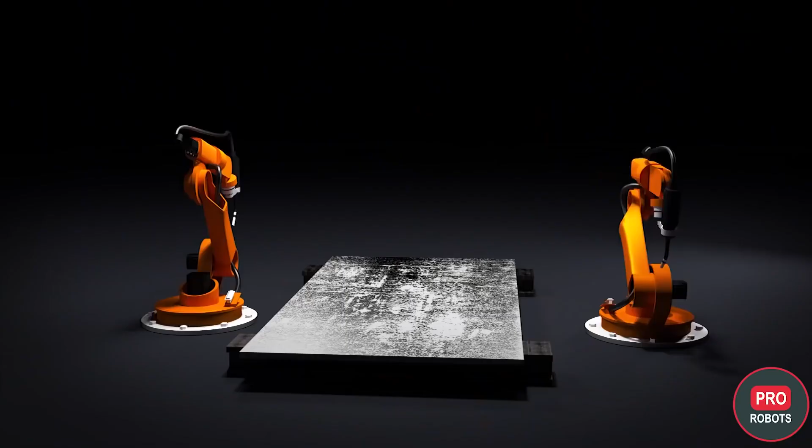The digitalization of relationships began with numerous dating apps in the past. Having collected a huge database of people and their preferences, developers have begun to actively implement artificial intelligence technology to select the ideal partner. But that's not all. To make a meeting a success, neural networks have learned not only to select places and give advice on behavior, but also to simulate future meetings in virtual reality, simulating the behavior of a potential partner.

We have to ask, what's next? It makes sense that further, on the available data, it will be possible to not only select, but also create a virtual partner or load the necessary qualities into a personalized robot partner.

And the first suitable robots to load artificial personalities could be adult robots. In fact, companies creating sexy humanoid robots have always positioned themselves precisely as a full-fledged partner capable of brightening up loneliness and providing psychological support. They can maintain a simple conversation, get to know their partner, remember what he likes, and that's better than nothing.

The most famous bot for adults, Harmony, even tries to identify human emotions and convey their own with facial expressions. In these cases, the robot looks at you the way you want. It will never have a headache. It will always laugh at your jokes, and it will never judge based on shortcomings.

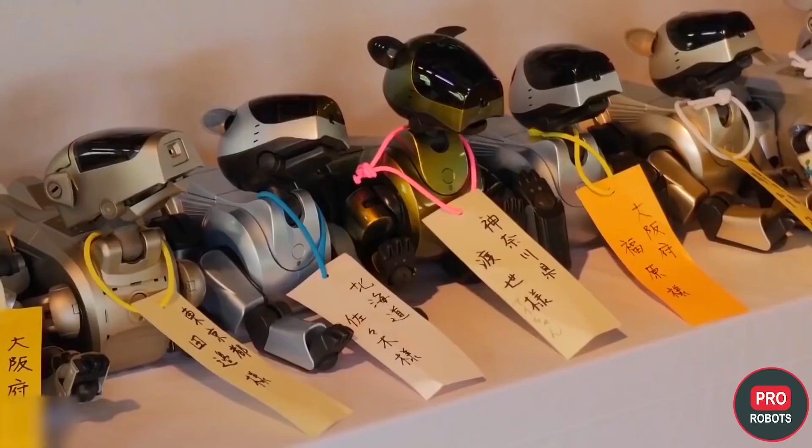There's also Aibo, Sony's robot dog, which won the heartfelt love of those who turned it on. When the company halted the project back in 2006, the robots gradually began to die due to a lack of spare parts and repair capabilities. This gave rise to a tradition in Japan of quite literally burying robots, as their loss was equated by their owners to the death of a real pet.

There's also the category of robotic companions for the elderly: small, social robots on wheels like PaPeRo; pet robots that purr and look you in the eye like Paro; and baby robots like Telenoid R1, a faceless robot on which seniors project the personalities of their lost loved ones.

They are all designed to fight the epidemic of loneliness, but can they actually do it? On the one hand, all of these technologies should help, but won't they cause the opposite effect? Wouldn't it be easier for people to give a robot to their aging partners than to visit them? Wouldn't having a relationship with a virtual partner be much easier and more enjoyable than having a real one?

Some countries, such as the UK and Japan, have already tasked the government with addressing these issues by creating ministers for loneliness. What do you think? Is happiness with a robot even possible?

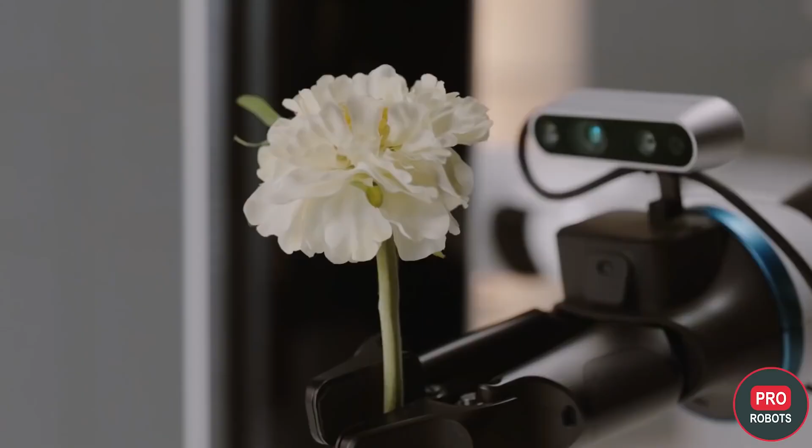The first discoveries of this year are Samsung's home robots. The smart and dexterous bot Handy can determine what material an object is made of in order to calculate the force required to maneuver it. The robot can pick up laundry, load the dishwasher, set your table, pour wine, and even bring your drinks. Cameras on the robot's head and limbs are responsible for object recognition.

For maneuvering and manipulation, only the robotic arm is used, which can rotate at 3 points, specifically in the shoulder, elbow, and wrist. The arm ends with a universal grip that works with objects of different sizes and shapes. The robot can move around the room on a platform, turn from side to side, and rise to reach higher objects.

For everyday cleaning, Samsung introduced the JetBot 90 AI Plus robot. It's a vacuum cleaner that uses LiDAR and 3D sensors to clean close to furniture and children's toys. The JetBot's internal camera can also be used to monitor pets.

A recent reality has been Moley Robotics' futuristic robot kitchen project. Not as futuristic as the concept, the robotic kitchen is already quite functional. The system is sold together with furniture and utensils, as everything is adapted for optimal robotics work based on proven industrial manipulators. The specially designed gripper can not only use spatulas and ladles, but also, for example, crack eggs, use a blender, or turn on the water.

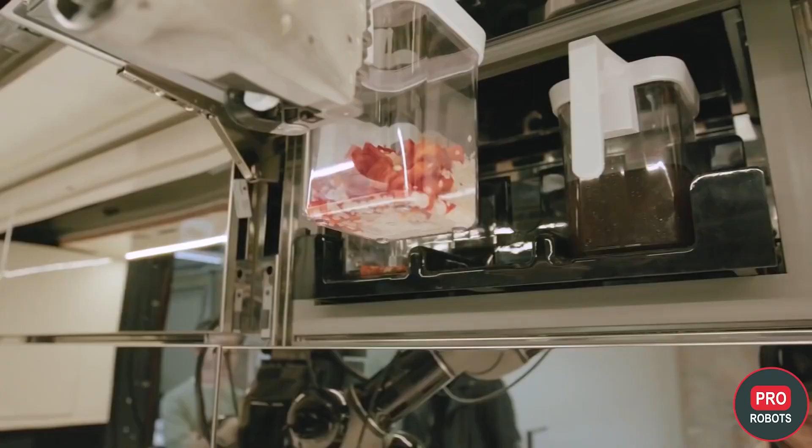The robot takes ingredients from human-prepared containers, but beyond that, the entire cooking process is fully automated. The robot was trained with the help of a camera recording the cooking process and its verbal description. Breaking down the recipe into simple steps such as stir, flip, salt makes it fairly easy to teach the robot new dishes.

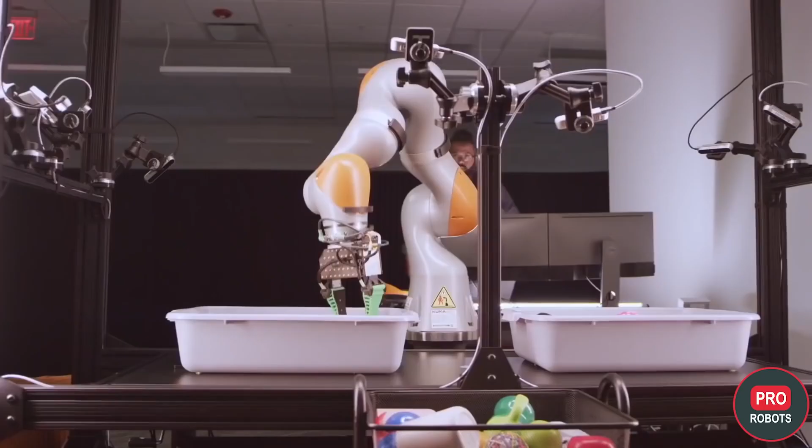The Toyota Research Institute showed its version of home robots not so long ago. The company's engineers are trying to solve two problems: teaching robots to perform everyday tasks around the house, and overcoming the limitations imposed by the unpredictable environment of each individual home. The latter task is partly solved by Toyota's new robot hanging from the ceiling, but it's also unlikely to be implemented in the existing modest-sized Japanese dwellings. Rather, these are developments for future homes and apartments.

Toyota is not saying much about the technology behind this robot, but it recently showed off its new lab, which was created to test this very robot.

The Chinese Institute of Industrial Technology introduced this year the dual-arm robot system, a robotic system with 2 arms and a total number of joints at 29. This dexterous robot with 5 fingers and 7 degrees of freedom can easily manipulate objects of different shapes and sizes, and they're made of composite material, which makes the robot lightweight yet durable.

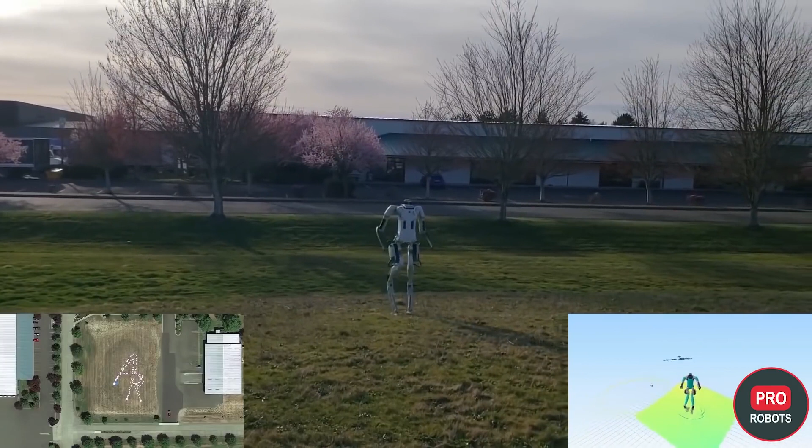This year, Agility Robotics has seriously upgraded its humanoid robot courier Digit, making it completely self-sufficient. All you need to do now is tell the robot the route or the endpoint and it will go where it needs to go, bypassing obstacles along the way. Digit is the world's first commercially available humanoid robot with 2 legs.

Currently, the price is unknown, but it's rumored to have 6 figures. The robot can lift weights up to 18 kilograms, gently bypassing people and interacting with other robots. Digit's main customer today is Ford, which plans to use the robot for deliveries in conjunction with its unmanned car. The robot uses LiDAR and multiple cameras mounted on its torso to scan its surroundings and quickly detect obstacles.

Now, from humanoid robots, let's move on to our 4-legged friend robots. A new and rather unusual robot dog was introduced this year by Tencent. The robot dog Max uses the original leg and wheel connection scheme from Tencent Robotics X Lab, which allows him to both walk on 4 legs and ride on wheels at 25 km per hour.

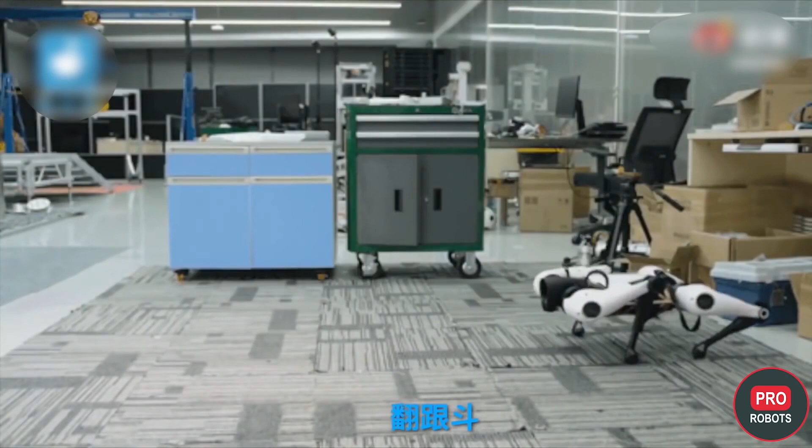Tencent's software and hardware platform allows the robot to sense its surroundings and control its own balance, as well as plan actions with calculation delays of only 0.3 milliseconds. This robot can also stand up after falling down.

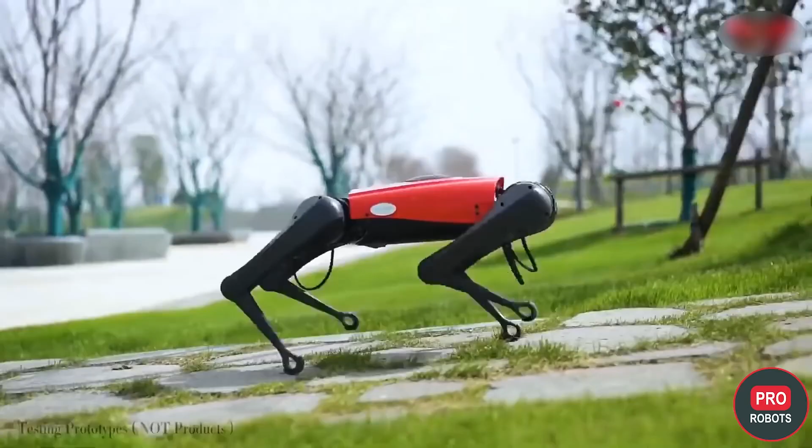The robot is also able to move autonomously, avoiding obstacles, maintaining balance, and getting up after a fall, and according to the manufacturer, perform a number of other tasks using artificial intelligence, for example, serving as a guide for the blind, guarding homes, or patrolling a park. It's already sold 2,000 units at a price of just under $2,500.

Boston Dynamics itself this year also introduced a couple of new products, specifically a brand new robot for warehouses named Stretch, and an updated version of the robot Spot with an incredibly nimble and smart robotic arm. We talked more about them in an issue about the company's robots, which you can find linked in the video description.

An unusual 4-legged novelty of the year was Hyundai's Tiger X1 robotic courier for hard-to-reach and remote locations. The robot is dropped off in the area by drone and then rides on wheels and rises on its feet to step over obstacles if necessary.

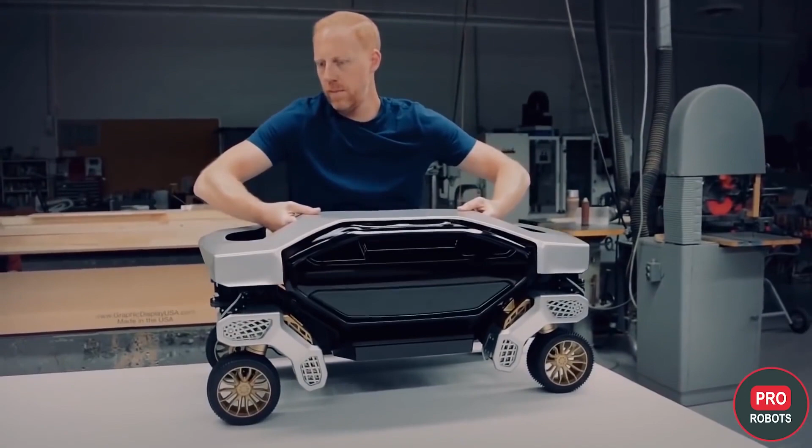The top of the robot can easily be replaced with a refrigerator or regular box. The robot has only a prototype so far, but it seems that Hyundai is serious about this technology development and plans to bring a commercial version to market.

We couldn't cover this without mentioning this year's protagonist, the Martian drone Ingenuity. Although it's not exactly a robot, the vehicle opened a new milestone in the history of exploration of other planets, and it's definitely worth mentioning. The Mars drone has already made 4 autonomous flights in the thin atmosphere of the Red Planet, which is only 1% of Earth's atmosphere.

It's not equipped with any scientific instruments, except a laser altimeter, a gyro stabilizer, and video cameras. One camera is responsible for navigation, i.e. determining location, direction, and speed. The second camera is a 13-megapixel color camera, and it takes pictures of the surface of Mars.

Communication with Earth is carried out through the rover. The mass of Ingenuity on Earth is 1.8 kilograms, and on Mars about 0.7 kilograms. The helicopter is lifted by 2 propellers, each 1.2 meters long and weighing only 35 grams. They are made of carbon fiber and covered with solar panels for recharging the drone.

A pair of parallel-mounted propellers rotates in opposite directions around a common axis at about 2,400 to 2,900 revolutions per minute. By comparison, terrestrial helicopters make about 500 revolutions per minute.

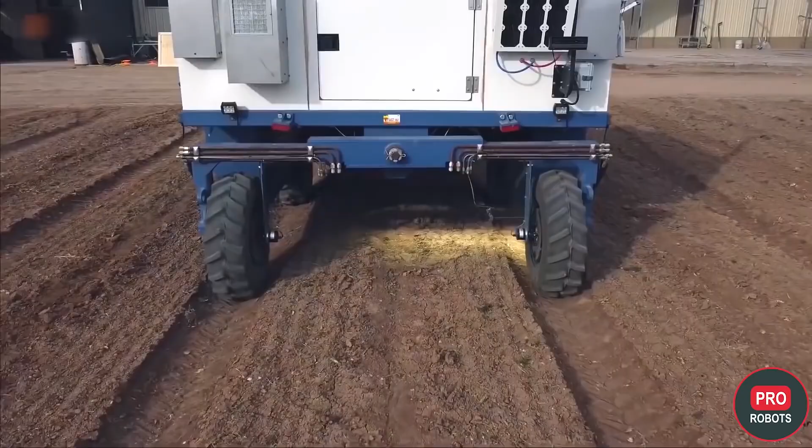Earth-based robotics have made their mark this year as well. Carbon Robotics unveiled a robot for destroying weeds with a laser. This autonomous robot uses computer vision, a powerful lighting system that allows the robot to accurately identify weeds at any time of day, as well as 8 150-watt carbon dioxide lasers. The robot weeds 6.5 hectares a day.

Australia is testing an apple-picking robot. The robot uses a combination of cameras and deep learning algorithms to scan trees and detect fruit, which requires it to process information about the shape, orientation, and branch location.

The robot can grip the apple with a specially designed pneumatically operated soft gripper that does not injure the fruit. The gripper can retrieve more than 85% of all apples on a tree, and the robot itself can identify more than 90% of the apples in its camera field of view at a distance of just over 1 meter. The machine can operate in all light and weather conditions and at speeds of 7 seconds per apple.

Construction robots also made their mark this year. There were no such spectacular ones as the HRP-5P, but the Baubot from Austrian startup Printstones also looks good.

It's an electrically driven robot that reaches its destination on cross-country tracks at speeds of just over 3 kilometers per hour. It can overcome stairs and thresholds, carry loads of up to 500 kilograms, and work for 8 hours without recharging. Baubot can be controlled from the display on the robot, from a smartphone, or by setting points on a pre-made map.

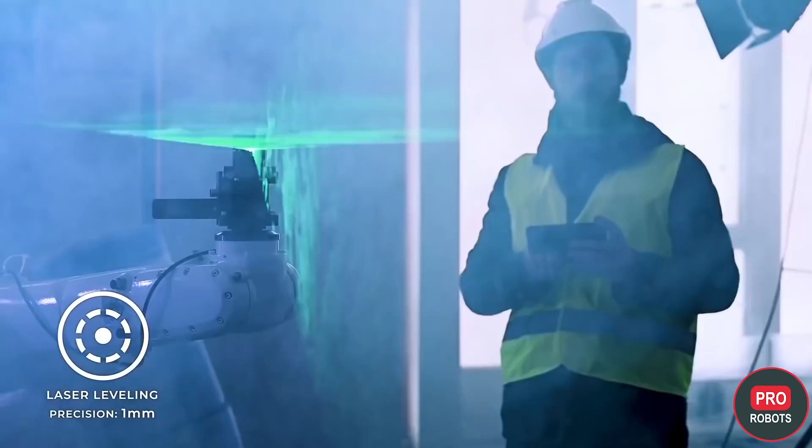The robot is equipped with cameras, its own lighting, and a robotic arm with a range of up to 1 meter and an accuracy tolerance of less than 1 millimeter.

The robot arm is designed to handle a variety of tools and can wrap a screw, weld metal, or lay bricks. In the future, after thousands of hours of training and simulation, the robot will be able to work not only with humans but also with other robots, letting the human only supervise the construction.

Another major discovery in robotics this year was microscopic robots capable of becoming medical instruments. The robots, created at Cornell University, are about 5 microns thick and only 40 microns wide. Equipped with feet the size of a few tens of atoms, they can move with laser pulses and interact directly with human body cells.

The robots are resistant to a variety of environments, including extreme acidity and temperatures. But most importantly, it's fast and easy to produce them. In theory, they can both heal wounds and form polymer shells around tumors, preventing them from growing.

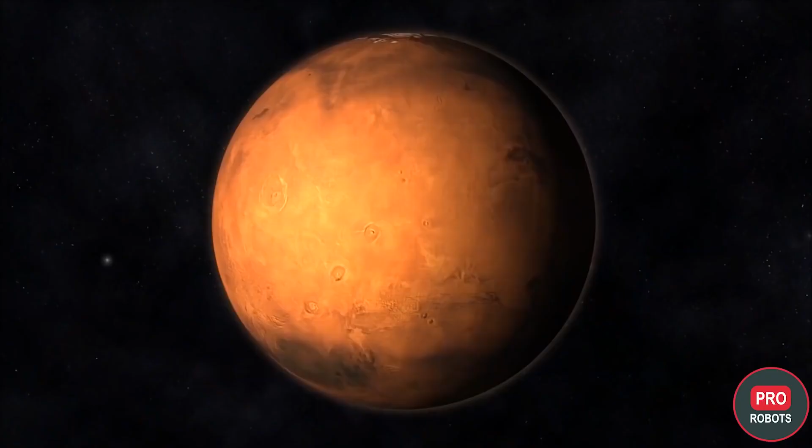"Sooner or later, life will have to go beyond our blue-green Earth ball, or we will go extinct," said Elon Musk, who founded SpaceX. Today we will tell you about a company about to go interplanetary: a success story, amazing facts, incredible achievements, and all of SpaceX's plans for the future in this one issue.

First, a little history. The entire American Apollo program was the brainchild of the government, which did not allow private businesses anywhere near the space industry.

Many did not like it, but it was ironically possible to change the situation for American enthusiasts thanks to the United States' main space opponent, the former Soviet Union. This is where the first steps were taken to establish commercial space services. Russia's reasonably priced, reliable rockets made space more accessible and opened it up to private companies.

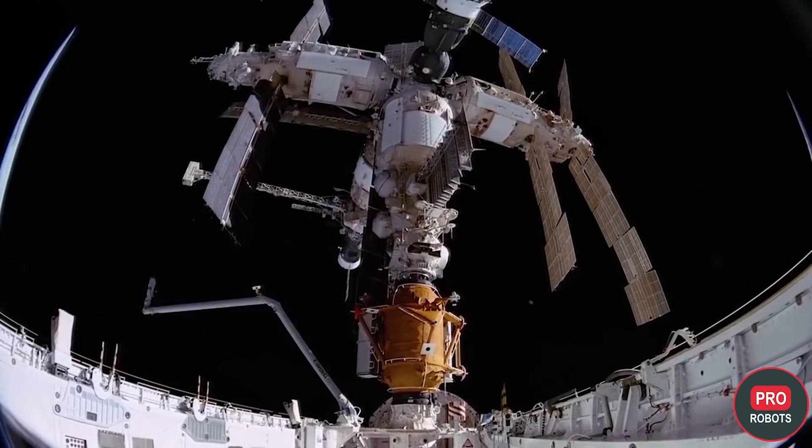In 2000, the Dutch company MirCorp was awarded a service contract for the Russian Mir space station. The year before Mir was taken out of orbit in 2001, it had made history by being the first to resupply the station with private funds, the first to organize a manned mission at private expense, and the first to contract a spaceflight for tourism purposes.

This rekindled interest in space in the US and spawned a wave of startups who sought to develop their own low-cost rockets. But lawmakers and corporations didn't want to embrace space entrepreneurship, and companies closed as quickly as they opened. And that's where Elon Musk comes into the picture.

In 2001, Musk introduced the Mars Oasis concept, a project to land a miniature experimental greenhouse and grow plants on Mars. This was his way of trying to regain public interest in space exploration and attract the attention of NASA.

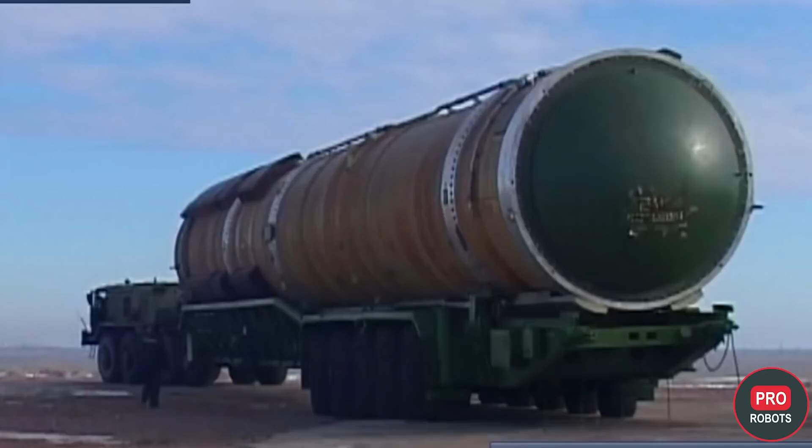To realize the project, he wanted to buy the Russian Dnieper rockets, twice coming to Russia to get them. The first time, the then-unknown entrepreneur was not taken seriously. The second time, negotiations were held, but the price of $8 million for the rocket did not satisfy the entrepreneur.

He calculated that the components of any rocket are only a few percent of its market value, and decided to build cheap rockets himself. Thus, in 2002, SpaceX appeared, in which the entrepreneur invested his own funds from the sale of his first IT startup, Zip2, and his share in PayPal.

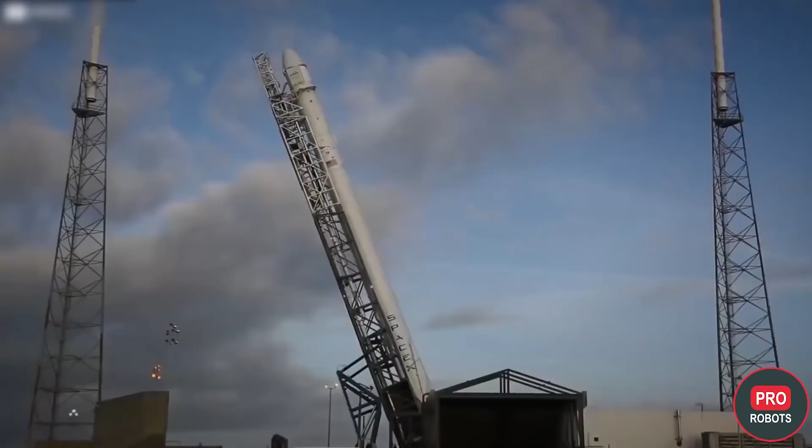Musk immediately calculated that to create a reliable and cheap rocket, all components for it must be produced by himself. In fact, the implementation of such a project without the participation of the state, the main customer of services in the space sphere, was nearly impossible. So the entrepreneur did his best to attract the attention of the public and NASA.

At the end of 2003, the businessman talked about the Falcon 1 rocket, taking it through all the states on a truck, which was parked, for example, right in front of the National Air and Space Museum in Washington.

And it got results. In 2004, Congress passed a law that made it much easier for commercial launch companies to enter the market. In 2005, NASA passed a new Commercial Orbital Transportation Services program. Instead of taking the whole process of designing and development on itself, the agency now simply defined the necessary characteristics of the transport and invited companies to participate in a contest for their best implementation.

SpaceX seized the opportunity, and in 2006 won a contract with NASA to develop the Falcon 9 rocket for $278 million. Its first successful launch was in 2010. In addition, in 2008, the company signed another contract with the agency, this time worth $1.6 billion, to deliver cargo to the International Space Station.

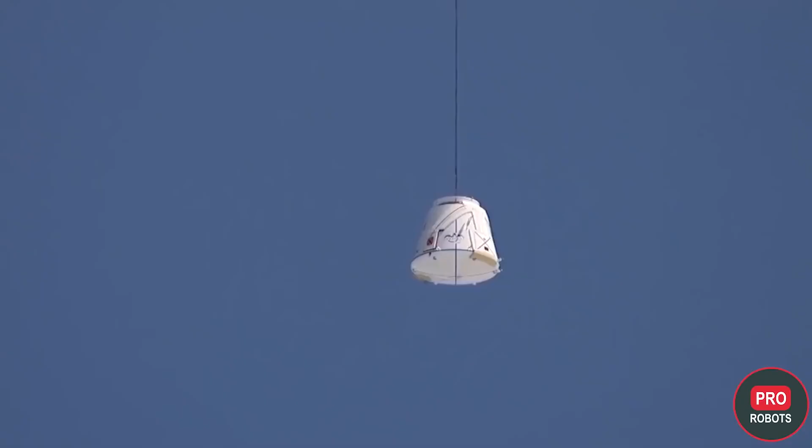The success of the company contributed to the fact that the big players in the US were not interested in such a small contract, but it was huge money for SpaceX. But back to the beginning.

The first launch of the company's first Falcon 1 rocket lasted only 1 minute. The second and third attempts were also unsuccessful. Only the fourth launch, in September of 2008, went according to plan, and the Falcon 1 successfully entered orbit, becoming the first private liquid propellant rocket to reach Earth's orbit.

Based on the Falcon 1, SpaceX is developing the Falcon 9, which includes 9 Merlin engines the company developed from scratch and tested on the first rocket. Interestingly, if one of the rocket's engines fails, it can still finish the mission. This makes Musk's rockets not only cheap, but also unique.

By the way, 85% of all components for both rockets, and in the future for the spacecraft Dragon, the company produces itself, while sometimes inventing equipment for their manufacture. For example, SpaceX had to design a machine for friction welding with agitation of the aluminum-lithium alloy for the body of Falcon 9, because such equipment did not yet exist.

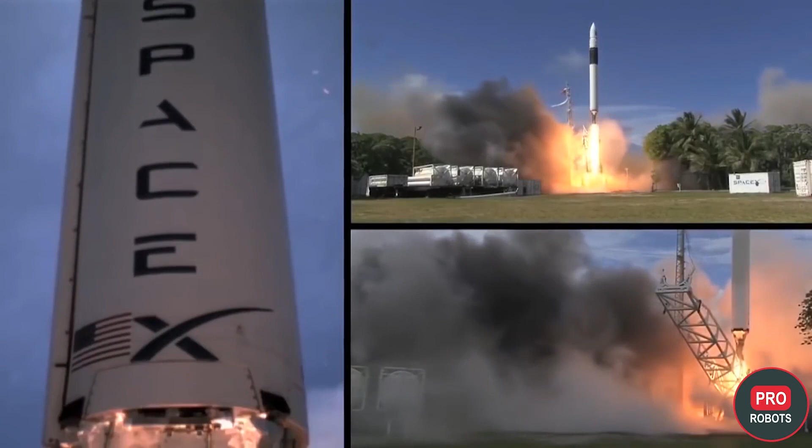In 2010, SpaceX made history again as the first private company to return its spacecraft from orbit. The unmanned Dragon landed on the Pacific Ocean a few hundred miles off the coast of Mexico.

Just two years later, SpaceX became the first private company to dock with the International Space Station. Astronauts aboard the space station used a robotic arm to drag the Dragon capsule to the docking port on the station. After the mission, SpaceX sent its craft to the International Space Station several more times to resupply the station.

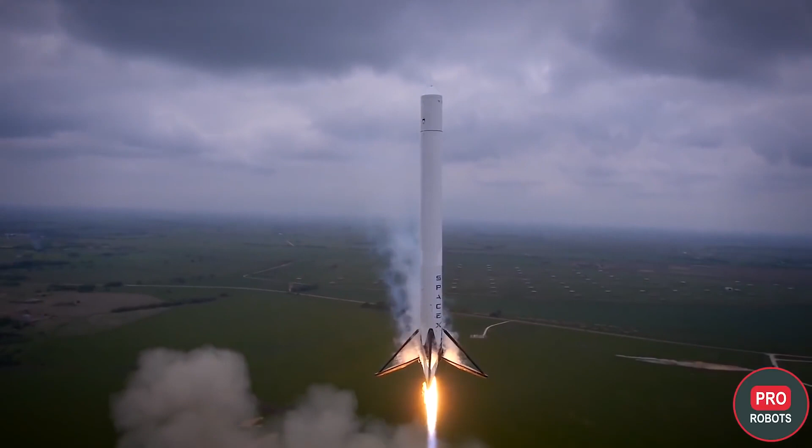In 2015, SpaceX made history yet again with the first unmanned vertical landing of the first stage of a Falcon 9 orbital rocket. Developing technology to land and reuse launch vehicles and spacecraft was one of the main reasons Elon Musk founded SpaceX, because only such technology could make flights to Mars more accessible, which is what the entrepreneur started it all for.

The Falcon 9 is a two-stage orbital rocket that has been used to launch satellites for companies and governments, resupply the International Space Station, and even send the US Air Force's top-secret space plane on its mysterious long missions. To date, the company has flown more than 80 Falcon 9 missions in just the past 9 years.

To make landing even easier, in 2016, SpaceX landed the stage on an unmanned ship floating in the ocean. In a tweet, Musk explains that landing on water isn't about being more cost-effective, it's actually more feasible because the launch vehicles must gain altitude in arc-shaped trajectories to reach orbital space.

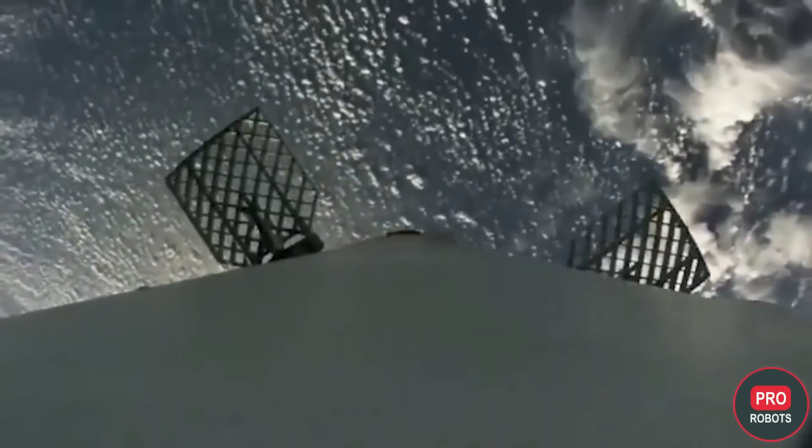In 2017, SpaceX became the first company to reuse the first stage of a rocket, and in May of 2018, SpaceX launched its first Block 5 Falcon 9 rocket, a definitive version designed to be reused up to 100 times with periodic repairs. Today, the maximum number of launches of the same stage is 9 times.

Of course, landing a rocket is only part of the equation when it comes to reusability and reducing the cost of space travel. So the SpaceX spacecraft itself can also be reused. On June 3rd of 2017, the company launched a Falcon 9 rocket with a previously used Dragon capsule on board, as part of its 11th mission to deliver supplies to the ISS.

In 2018, SpaceX launches Falcon Heavy, a modular rocket consisting of 3 Falcon 9s, for the first time. With 27 engines, it became the most powerful rocket launched in the US since Saturn V. We talked more about these legendary rockets in the episode up in the hint.

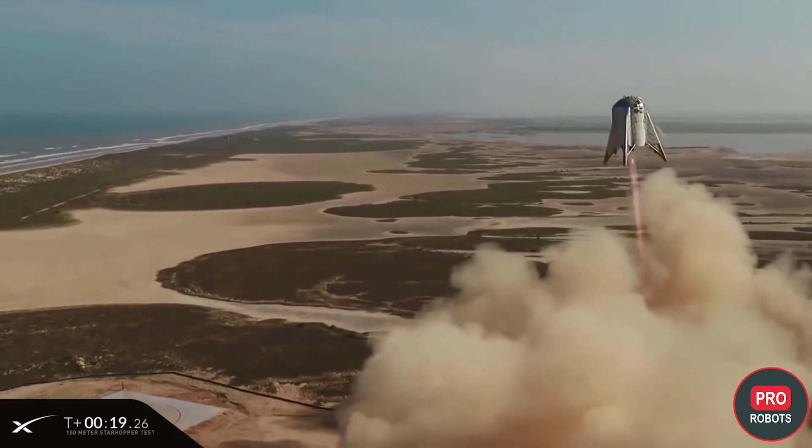After the Falcon Heavy, Musk begins testing Starhopper, a prototype of the Starship, which in the future will have to take people to Mars. By the way, SpaceX shares should go on public sale only after the company sends a mission to Mars, which has been said repeatedly by Elon himself. The new Raptor rocket engines were developed for the mission, the power of which was tested by jumping Starhopper.

In parallel, the company completed tests of the Crew Dragon passenger capsule and sent people to the ISS on May 30th of 2020. Although the flight went smoothly, astronauts Bob Behnken and Doug Hurley said the Falcon 9 flight was a bit heavier than expected.

Still, 2 months later, the Demo 2 capsule, renamed Endeavour, returned to Earth on August 2, 2020, with the astronauts aboard. To reduce G-loads, the capsule seating angle was changed, reducing its capacity from 7 to 4 people, but making the flight much more enjoyable.

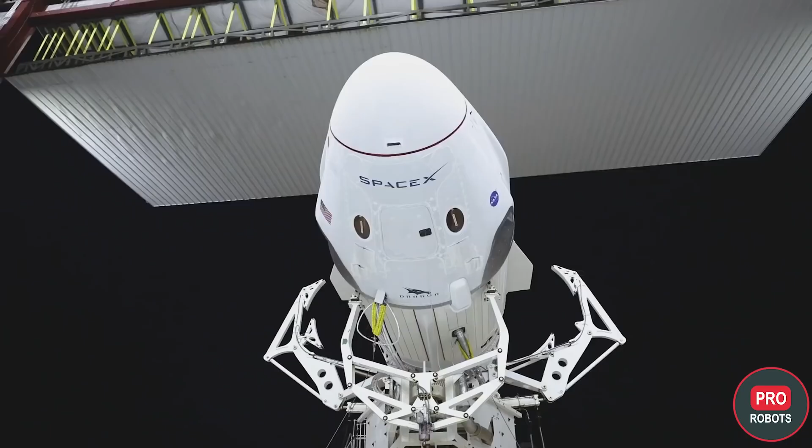In November, the Crew Dragon became the first ever NASA-certified commercial spacecraft and sent 4 people to the ISS aboard the Crew 1 mission. The SpaceX spacecraft can dock with the ISS in automatic or manual mode.

Crew Dragon does not have the usual panels with many buttons and switches. It's the first video game-style, touchscreen-controlled ship. 3 monitors are backed up by a few spare buttons underneath. Remember, the flight on the Crew Dragon is in automatic mode, and manual control is needed only for emergencies.

April 23, 2021, Crew Dragon spacecraft again sent astronauts to the ISS. Meanwhile, SpaceX's next flight, scheduled for September 15th, should go down in history as the first all-private and all-civilian mission, appropriately named Inspiration 4. Then there will be the October 23rd flight, with 3 astronauts and a 4th, as of yet unnamed, crew member aboard the ship. But back to the ambitious plans to conquer Mars.

In August of 2020, the company tested a complete Starship prototype, the SN5. After the SN5's 150-meter jump, Elon Musk tweeted that flying to Mars began to seem like a reality. The test flight of the SN5 Starship prototype used a single Raptor engine, whereas the final version of the rocket will include about 41 engines.

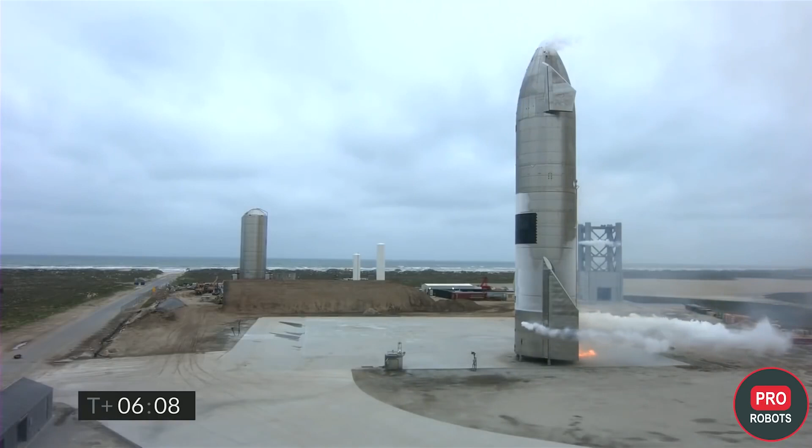On May 5th of this year, the last SN15 prototype rocketed to an altitude of about 10 kilometers and successfully landed on the launch pad for the first time. True, there was a small fire on the ground, but it was quickly extinguished. This is a normal phenomenon for the fuel that is used, explained the company's engineer John Insprucker. Recall that previous Starship prototypes have mostly exploded on landing.

Most recently, in April of 2021, NASA selected Starship to land humans on the Moon. The agency also commissioned the company to design and build a lunar landing model, but NASA later had to freeze that contract because of protests from competitors.

The protest to the U.S. Chamber of Accounts was filed by Jeff Bezos, head of Blue Origin, which considers itself a competitor to SpaceX. Until the end of Bezos' complaint, Musk will not receive money for the development of the lunar program, and this despite the fact that Musk asked the agency for the smallest amount compared to the competitors. From a technical point of view, the solution proposed by SpaceX is considered the most difficult and risky.

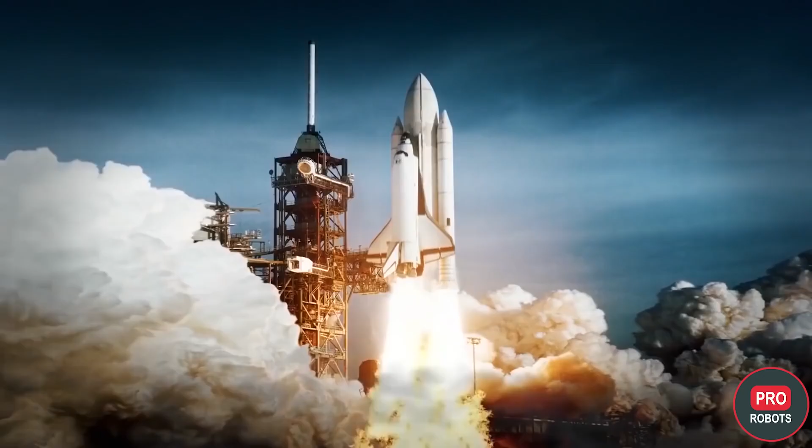For SpaceX, the Moon should become a new milestone on the way to the main goal: flights to Mars. Musk does not spread about how life will be organized on the Red Planet. He says SpaceX is primarily interested in providing transportation, letting others worry about infrastructure. However, some believe that a subsidiary of SpaceX, the Boring Company, will someday be able to lay tunnels on Mars that could be used for human habitation.

Incidentally, a new source of funding for Musk's Martian plans could be the Starlink project. If the global satellite system for broadband internet access attracts 25 million internet subscribers, it will generate about $30 billion a year, which is 10 times more than what the company earns from launching rockets. At least that's what SpaceX President Gwynne Shotwell said in a recent interview.

Today, Starlink has more than 1,500 satellites in orbit. The network is already available for test use, and the company is taking steps to draw less criticism. For example, SpaceX is going to equip its satellites with a special sunshade to reduce their reflectivity and impact on astronomical observations. More than 500,000 customers have pre-ordered Starlink.

The company hopes to have near-global network coverage by the end of this year. This is aided by the recent US FCC approval to move satellites to a lower orbit, which Starlink's competitors have vigorously opposed. The lower orbit will provide more internet speed from the company.

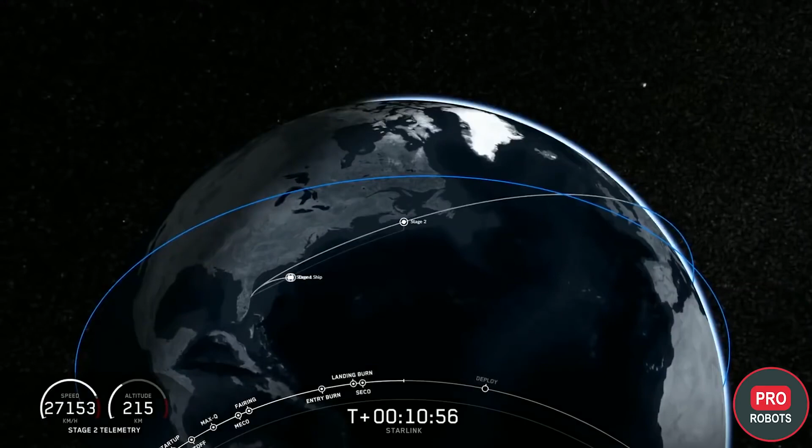SpaceX's immediate plans include sending a Japanese billionaire on a Starship mission around the Moon in 2023, landing humans on the Moon in 2024, and landing humans on Mars in 2026. Musk has a bad reputation for meeting deadlines, but a good one in terms of keeping his promises sooner or later.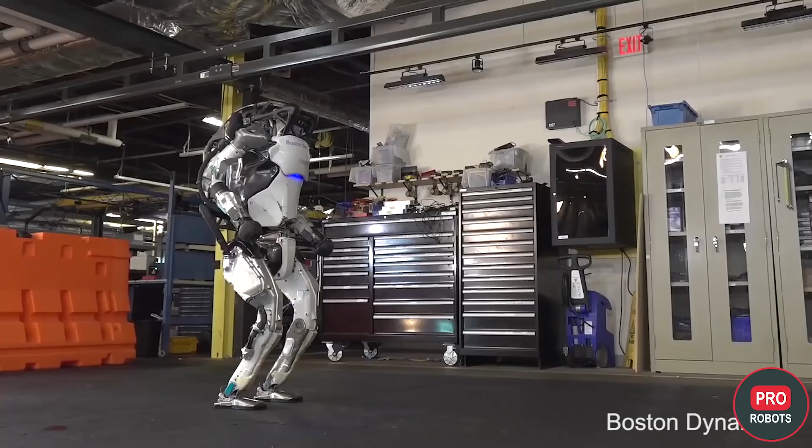Anthropomorphic bipedal robots are certainly the most spectacular, but far from the most practical. Four-legged robots are much more stable. See the top of the most unusual, strongest, strangest, and most amazing four-legged robots to date. Here we go.

The strongest four-legged robot in the world is HyQReal, created by developers at the Italian Institute of Technology. The hydraulically powered robot weighs 130 kilograms, is 1.3 meters long, and just under a meter high. A 48-volt battery powers two computers, one for visual data processing and one for motion calculation.

Four electric motors drive hydraulic pumps which create pressure in the system. This power of hydraulics is enough to tow a Piaggio P180 Avanti passenger plane weighing 3.3 tons. In testing, the robot was able to pull the airplane 10 meters.

The robust, reliable, and energy-efficient robot is fully autonomous. HyQReal's aluminum frame is lined with Kevlar, fiberglass, and plastic. The robot is designed to support people in emergency situations.

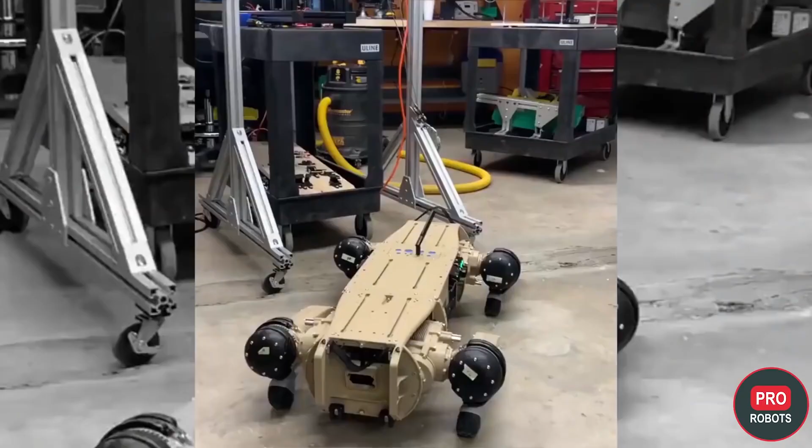The most practical four-legged robot is probably the Vision 60 from Ghost Robotics. This is the first robot dog to get a real job on a US military base. Although the price has not yet been disclosed, we know the military chose Vision 60, which they named QUGV, or Four-Legged Unmanned Ground Vehicle, for its low cost, reliability, and practicality.

The robot is not afraid of dirt. It can overcome steep and stony slopes, crawl in a half-crouch through grass, run fast on flat terrain, as well as overcome water obstacles. The robot's design is modular, and any failed components can be replaced by a spare in just a few minutes.

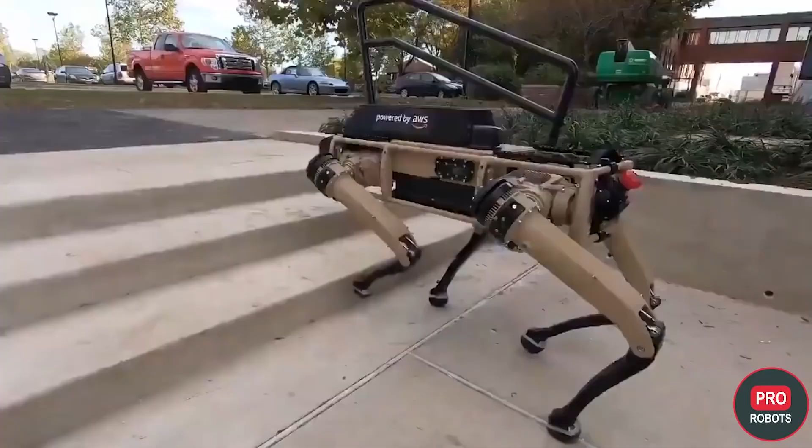The QUGV is designed to patrol the perimeter of military bases. The robot can be controlled using a virtual reality headset. If the operator sees intruders near the base, he can order them to leave the protected area using a radio attached to the robot.

The first alien four-legged robot could be Boston Dynamics' Spot Robot. We talked in detail about the company's robot in the issue at the link in the hint. Here we look at the prospects of a robot for Mars exploration.

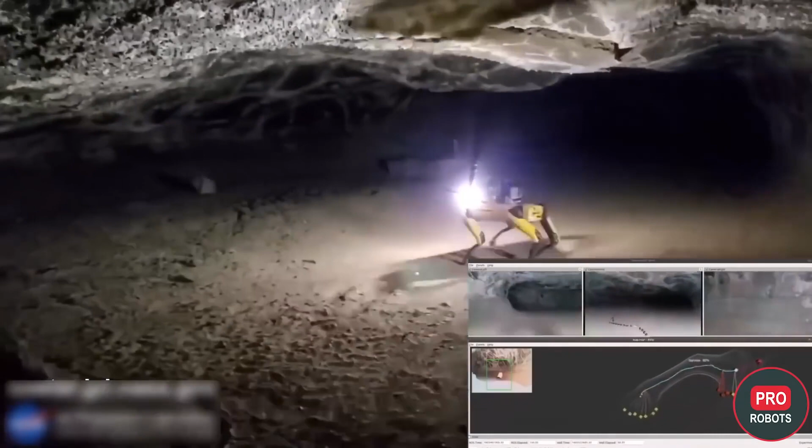The idea is to use robot dogs that come from underground orienteering competitions, won by an upgraded version of the AU Spot Robot. The robot dog got network sensors and software that allow it to safely and autonomously scan, navigate, and map the environment and underground tunnels. AU Spot processes input from LiDAR, visual, thermal, and motion sensors to create three-dimensional maps.

The future Mars dog also uses artificial intelligence to learn what structures to avoid and identify objects that might be of scientific interest, all while a single communications module allows the robot to transmit data to the surface while it explores underground.

Spot's direct competitor, the ANYmal C robot, was the world's first robopod to demonstrate no water phobia. The quadruped is able to move at speeds of 1 meter per second and perform other tasks for more than 2 hours. The robot weighs 50 kilograms, is 80 centimeters high, and can carry loads of up to 10 kilograms.

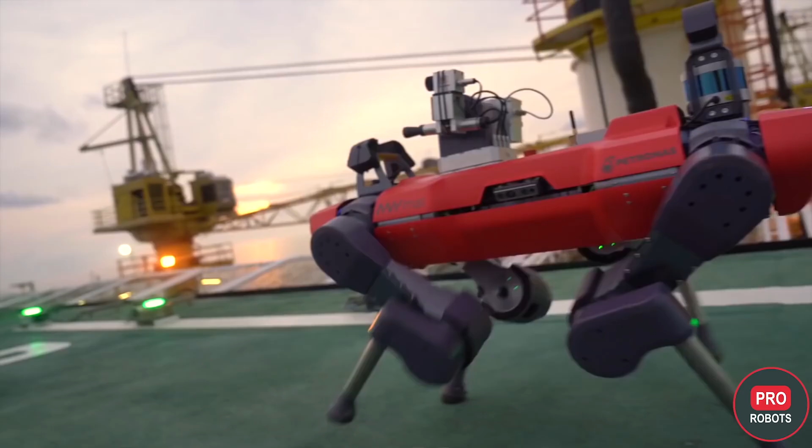To navigate, ANYmal C uses a bunch of LiDAR at the top of the body and depth cameras mounted on each side. This allows it to produce a three-dimensional and highly accurate map of the environment around it in real time. A computer with two 6-core Intel i7 processors and another dual-core Intel i7 processor handles sensor information processing and other calculations.

In addition, there's an interface on top that can be used to connect an NVIDIA Jetson AGX Xavier board to the robot, and this interface can also be used to extend the robot's capabilities.

The Cheetah 3 robot was the first and so far the only completely blind robot still able to move on difficult terrain, including stairs, jumping, and maintaining its equilibrium under external influences. Engineers at MIT deprived the robot of cameras, LiDARs, and radars, but equipped it with two algorithms that help it move by touch.

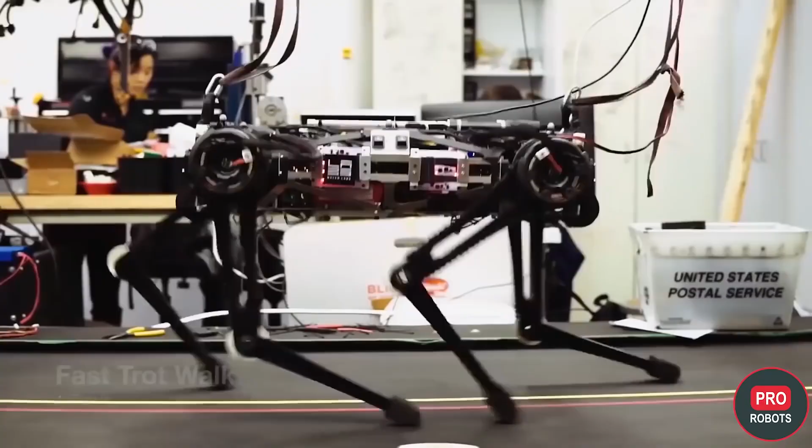The first algorithm tells the Cheetah 3 about the condition of each limb 20 times per second, using data from gyroscopes and accelerometers. It calculates the chances of each foot making contact with the ground, the probability of force generated when the foot steps on the ground, and the probability that the foot will not touch the ground where expected. Based on this real-time data, the robot calculates how and when to move its feet.

A second model predictive control algorithm calculates the foot and body position options half a second into the future. This helps the robot maintain its balance even when sudden external impacts occur.

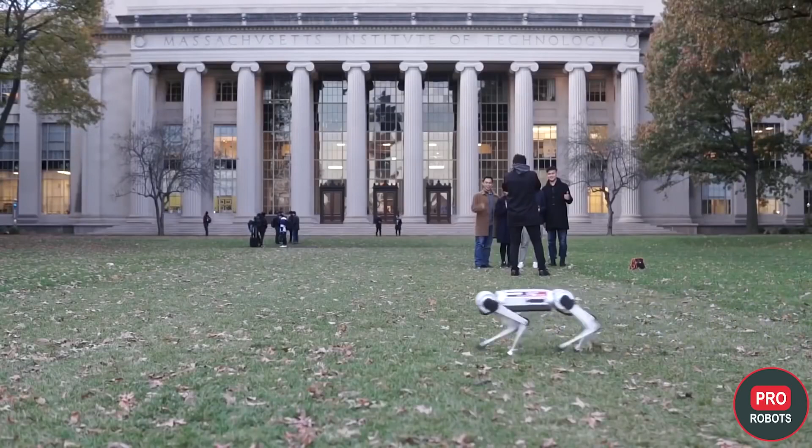At the same time, the robot's knees bend both ways, so it doesn't have any need to worry about turning around. By the way, the Cheetah 3's little brother, the Mini Cheetah robot, is probably one of the most nimble quadrupeds in the world.

The 9-kilogram research robot can run almost 9 kilometers per hour, do somersaults, and land carefully when falling from heights.

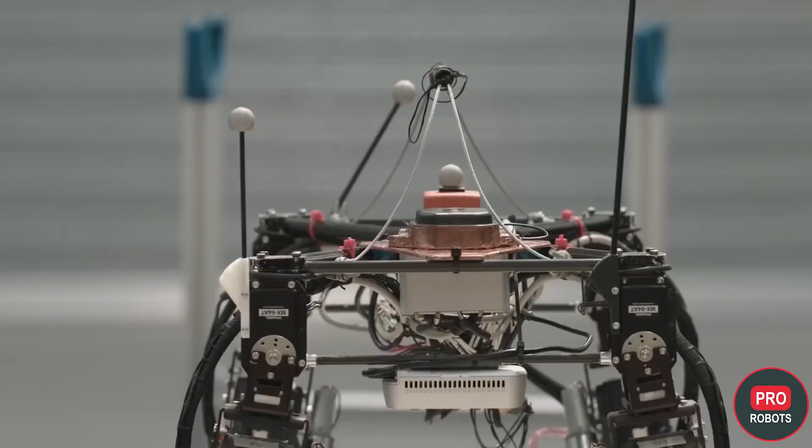In the future, engineers want to develop a simple and reliable, fully transformable robot for unpredictable environments, which will be able to change not only legs, but also the body.

A group of Google researchers has created a robot that can learn to walk on its own with minimal human intervention. Deep learning with reinforcement helped Google's robot Rainbow Dash learn to walk on difficult surfaces by trial and error.

A special feature of the study was that the robot learned to walk not only in a simulation, but immediately thereafter in person. It took Robot Dash only 1.5 hours to learn how to walk on a flat floor from scratch.

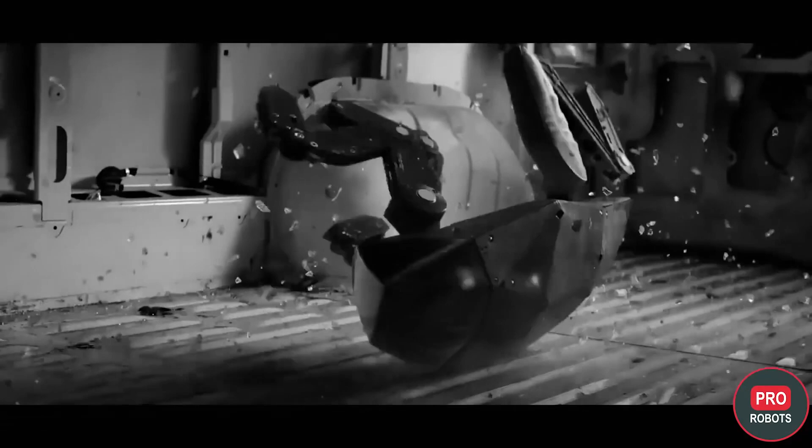Additionally, it took only 5.5 and 4.5 hours to learn to walk on a soft mattress and a relief mat respectively. Interestingly enough, if we combine the abilities of all the robots we've mentioned above, we would have a fully autonomous, self-learning, powerful robot capable of self-learning skills, performing complex tasks even blindly, and transforming to achieve goals.

But enough of our heads in the clouds, let's get back to these amazing quadrupeds. Swiss engineers have taught a robot to skate deftly on ice for the first time.

Thanks to software developed to quickly create and train robots of various designs, the robot, affectionately named Skaterbot, was able to learn wave-like movements on its own, allowing it to not only skate forward, but also turn in the right direction.

The world's most unusual four-legged robot by design is ALPHRED 2. Engineers at the University of California, Los Angeles have created a robot whose legs can bend in both directions and also rotate relative to each other.

For example, it's possible to use 3 legs to move around and 1 to push a door, or conversely, 2 legs to stand still and 2 more to move small objects.

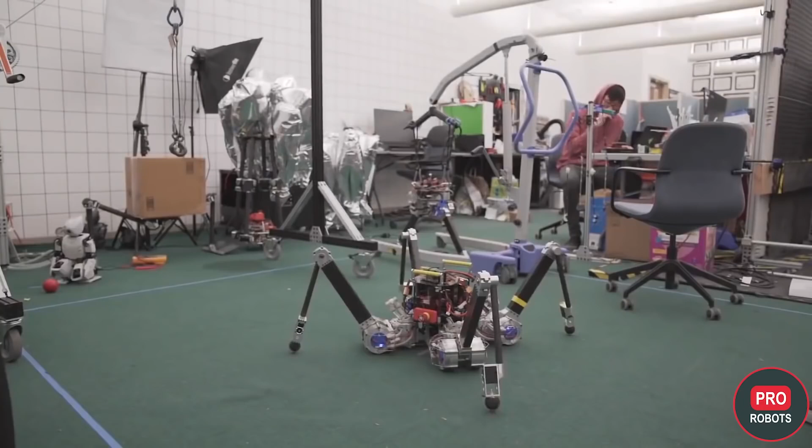Each leg of the robot has 3 segments and a small folding section at the end. There are 2 such sections on 2 legs and 1 on 2 more. They can synchronously rotate and allow the robot to stand on 2 legs so it doesn't fall on its side.

So far, the cheapest 4-legged robot in the world is Solo 8, developed by a team from New York University's Tandon School of Engineering. The open-source robot for schools and institutes is similar in functionality to its more expensive counterparts, particularly thanks to its torque-controlled motors.

The robot can bounce, get up after a fall, and flip over. All parts of the robot can be printed on a 3D printer or bought in a store. The robot can be used for research in the field of movement on different types of terrain, training with reinforcement of complex and dynamic behaviors, and more.

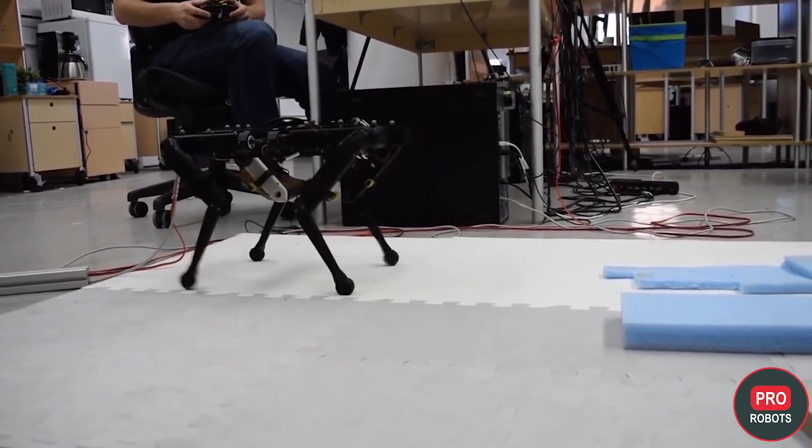Unfortunately, we haven't heard for a long time about the Centauro robot, a promising development for rescue operations. The robot was designed to combine the best of both worlds, the stability of a quadruped and the agility of a humanoid. The robot's legs could change height and move apart for greater stability, whereas strong arms were designed to free the way and even work with human tools.

The 90-kilogram, 1.5-meter-long robot was controlled by an operator through a system that mimicked the movements of a human body part without using an exoskeleton.

The system uses an ASUS Xtion Pro depth camera for motion detection, with data sent to the OpenPose algorithm, allowing you to control the robot without any training.

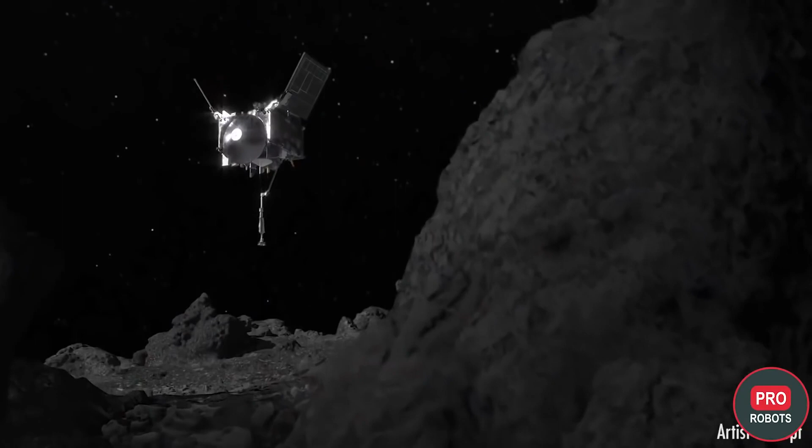We'll kick this off with the latest news from Mars.

The Perseverance rover began exploring Martian boulders with a robotic arm. It took pictures of the rocky formations with the Watson camera, and the SuperCam laser tool examined their chemical composition. It also imaged the planet's surface with the MASTCAM-Z instrument, a multispectral stereoscopic camera with zoom capability. NASA scientists hope to understand how the boulders were formed, whether as a result of volcanic activity or as sedimentary rocks.

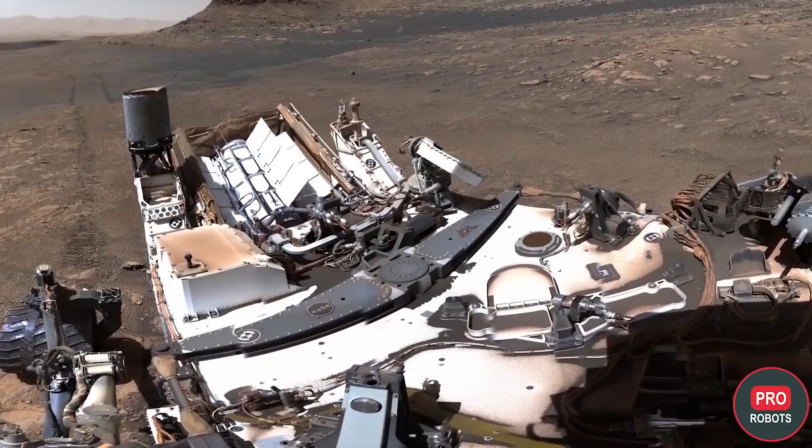NASA's other famous rover, the Curiosity, may end up without one wheel. Movement on the rocky surface of Mars has caused some of the rover's wheels to become damaged. In the future, this may lead to the need for a special maneuver to drop one of the damaged wheels. Each wheel consists of inner and outer parts with 19 grousers, made of aluminum sheets 0.75 millimeters thick. Experts note the wheels are fully operational now, but wear is faster than expected.

The Chinese vehicle Tianwen-1 has successfully landed on the surface of Mars near the southern Utopia plain in the northern hemisphere of the planet. Tianwen-1 consists of an orbital module, a landing platform, and the Mars rover Zhurong. The 240-kilogram solar-powered rover is to survey the landing site and then study the planet's geology and atmosphere. It has a mast with a high-resolution camera for photography and navigation, as well as ground-penetrating radar to search for underground water and ice. Exploration is expected to last about 90 Martian days.

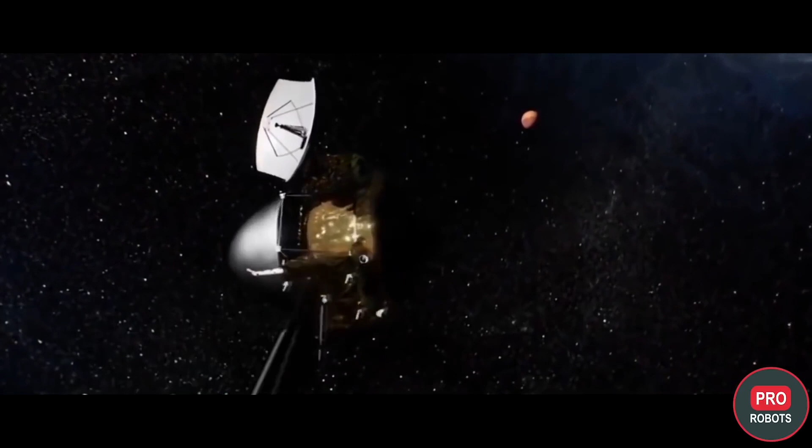Scientists at Stanford University have developed a system that recognizes capital letters presented to the brain with an accuracy of up to 94% when typing online, and over 99% in auto-correct mode. The character typing rate was 90 per minute, compared to the previous record of only 40. Two implanted sets of electrodes monitor the activity of about 200 neurons in the motor cortex, responsible for hand movements. Although the paralyzed volunteer was unable to move his arm due to spinal damage, this area of the brain still generated the same signals as before.

SpaceX has scheduled a test orbital flight of the Starship from Texas to Hawaii. The flight will test the combined operation of the spaceship and the Super Heavy launch vehicle. It will take just over 90 minutes to reach a maximum altitude of 116 kilometers and will land about 100 kilometers off the northwest coast of Kauai. Thus, Starship will make almost a complete orbit around the Earth. The test should take place by March 1st, 2022, and that same month SpaceX is set to run at least a couple of prototypes of the Starship, a repeat for the SN-15 and a first test for the SN-16.

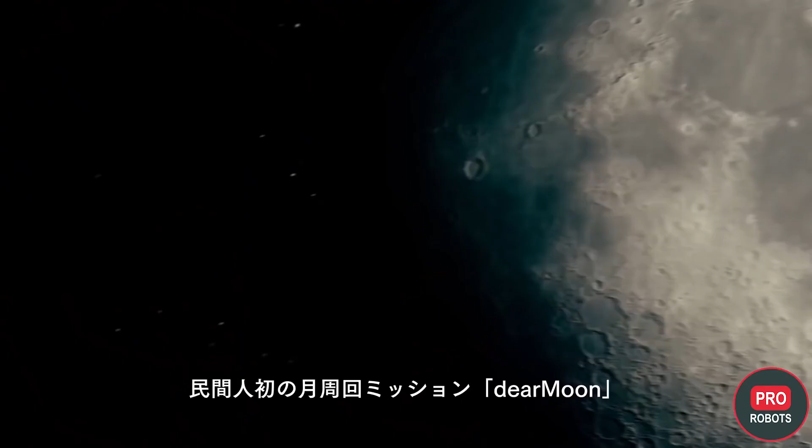Japanese billionaire Yusaku Maezawa, who intends to fly around the moon in Elon's Starship, will travel to the International Space Station as early as this December as a space tourist. Maezawa and his business assistant Yozo Hirano will travel to the ISS on Russia's Soyuz MS-20 spacecraft from Baikonur Cosmodrome on December 8, 2021. The duration of this flight will be 12 days.

The Voyager 1 probe made itself known for transmitting to Earth the sound of interstellar space. The strong activity of electrons in interstellar space, beyond the reach of the solar wind, was a real discovery. This information will help better understand processes outside stellar systems. Launched more than 40 years ago and having left the heliosphere of the solar system, Voyager 1 was the first man-made interstellar spacecraft. We've told you more about it in the past, and you can watch that episode linked here.

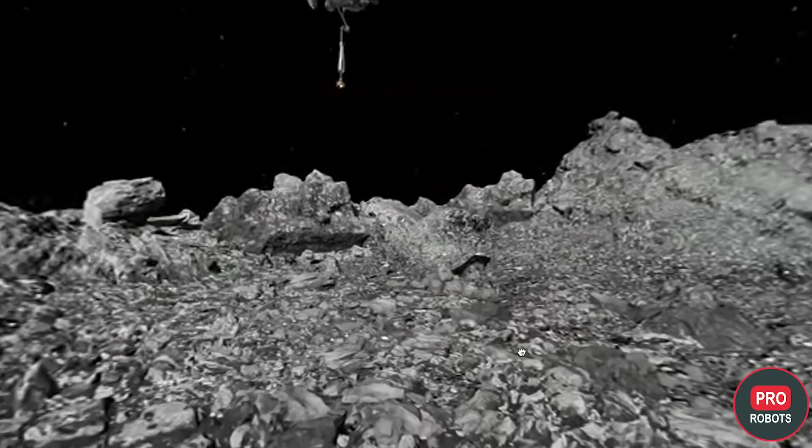NASA reported that the OSIRIS-REx probe left the vicinity of the asteroid Bennu and began its return trip to Earth, to deliver samples of the asteroid for comprehensive laboratory studies. So far, Earth has soil samples from two celestial bodies, the Moon and the asteroid Ryugu.

China has launched the Tianhe base module for its own space station into space, which could take 18 months to build and will require another 10 to 11 launches. The station itself was named Tiangong, which translates to Heavenly Palace. The Tianhe module is the basis of the station, including life support and control systems. In addition, it will become the living quarters for 3 astronauts. Now Tianhe is in low Earth orbit and can be seen from Earth with the naked eye.

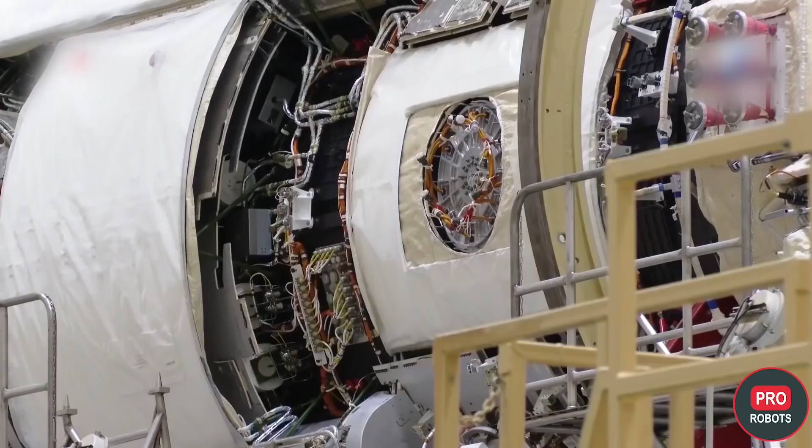Roscosmos has reported the successful completion of ground pneumo-vacuum tests of the Nauka module, scheduled to be launched to the International Space Station in July of this year. The tests checked the tightness of the hull, hatches, and docking units. Experts also inspected the functioning of the pneumatic hydraulic system, propulsion systems, and external hydraulic complexes. A European robotic arm will be installed on the module to perform extravehicular activities and maintenance of the ISS.

IBM is creating a database to train artificial intelligence to program, and somewhere now a Terminator is laughing. But as you know, this is a joke.

The set, called Project CodeNet, contains 14 million samples totaling 500 million lines of code in more than 55 programming languages, with the main base being C++ and Python. IBM wants the project to become a standard dataset for training AI models that can recognize the structure of programs. It's envisioned that CodeNet could be used to create intelligent development tools. Practical applications include searching in applications, translating from one programming language to another, and choosing the right code implementations, among others.

Elon Musk promises to open access to the FSD Autopilot by subscription in June. He emphasizes that the 9th beta version of FSD will start distributing in the US next week, and the final release, after elimination of remaining flaws, will take place a couple of weeks later. According to Musk, the difference compared to the previous version of FSD will be huge.

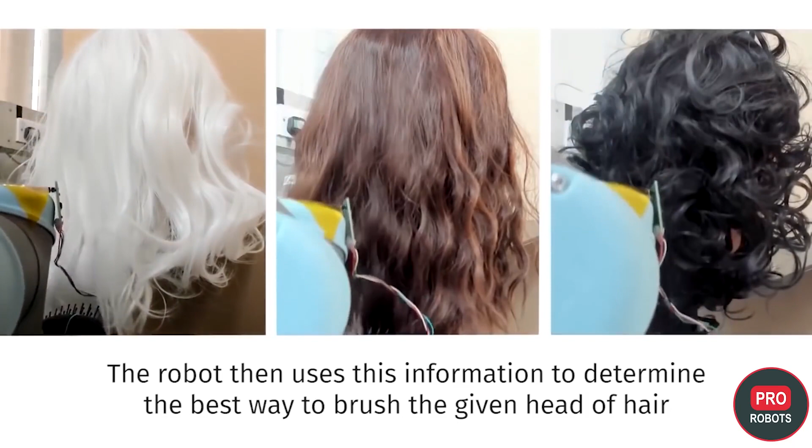Scientists at MIT's Computer Science and Artificial Intelligence Laboratory have developed a robot for untangling hair, called RoboWig. It's equipped with a camera and a sensor brush that allows it to assess the strength of the impact on the hair. The developers represented tangled hair as a set of intertwined double spirals similar to DNA strands. This level of detail allowed the robot to gain key understandings of the mathematical models and control systems for manipulating bundles of soft fibers.

SoftBank has sold Boston Dynamics, but it continues to fund robot startups. For example, the company invested $15 million in Youibot, a Chinese manufacturer of industrial robots. The company develops solutions for the automation of production and logistics management, as well as inspection and maintenance for various industries.

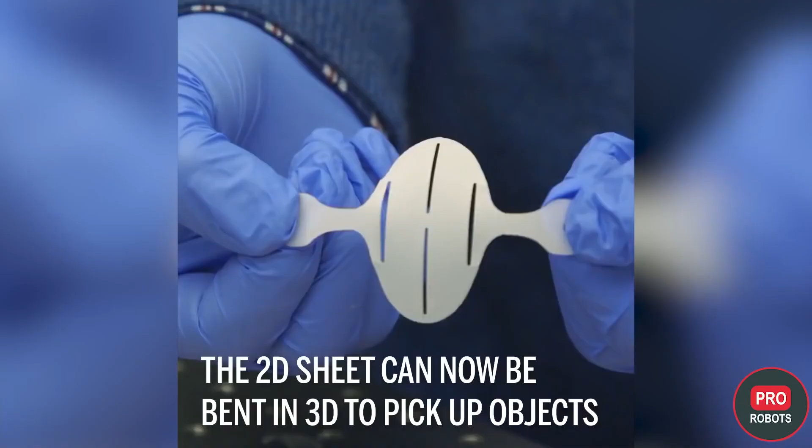Developers from Boston University have created a robotic gripper capable of lifting even a single grain of sand. Inspired by the ancient Japanese art of kirigami, the gripper can handle the smallest, most fragile, slippery, and irregular objects through cushioning. The flexible, thin, elastic shell grip is shaped like a four-petal flower and decorated with neatly arranged linear cuts. The result is a scalable cell that can be bent in 3D to pick up objects. The grip can work alone, or it can be made into a chain to grip many objects at one time.

The United States Air Force unveiled the F-16 Viper aircraft washing robot. The robot is able to wash the aircraft in as little as 1 hour, whereas a team of usually 4 humans needs about 6 hours and chemical protective suits to do so. After all, the fighter often serves as a close air support platform, flying low-altitude missions in support of friendly troops, which means, purely theoretically, it could be contaminated with hazardous chemicals from potential adversaries.

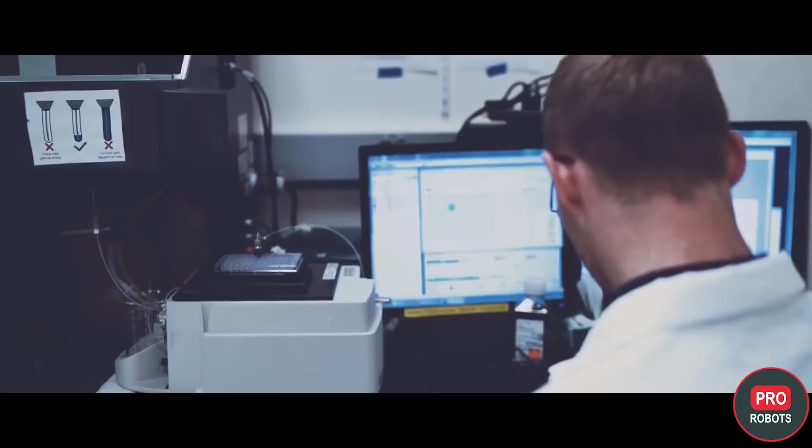E-Ink, an e-book company, was able to adapt its e-ink technology to inkjet microprint biological objects, complex proteins, and even genes. Nuclera, a bioengineering company, helped to do this. Now it's preparing to develop and produce desktop bioprinters with broad capabilities. E-Ink has learned how to control the size of droplets and their direction using electric fields. Printing biomaterials using e-ink technology is expected to revolutionize many areas related to human health, agriculture, and other fields.

Australian engineers have developed artificial muscle fibers from twisted pairs of polyester filaments. Thanks to hydrogel, which swells when the pH of the environment changes, the filaments are able to increase in volume and twist into loops when the ends are fixed, mimicking the contraction of real muscles. The new artificial muscle fibers are capable of contracting by an unprecedented 90% and could be useful in the future for creating micro-robots and surgical micro-instruments, for example micro scissors or tweezers, the body of which could be made using 3D printing.

Marines from the United Kingdom have tested shipboarding with the Gravity Industries jetpack. For example, one of the Marines launched from a boat, caught up with the ship, landed on the deck, and dropped a ladder over the side for the rest of the crew. The test was deemed a success, although it's worth noting that the roar of the engines would not allow a Marine to land on an enemy ship without being detected.

A way out of this could be the shoulder turret that Gravity Industries tried to create with James Burton in 2019, but that concept apparently didn't get a follow-up.

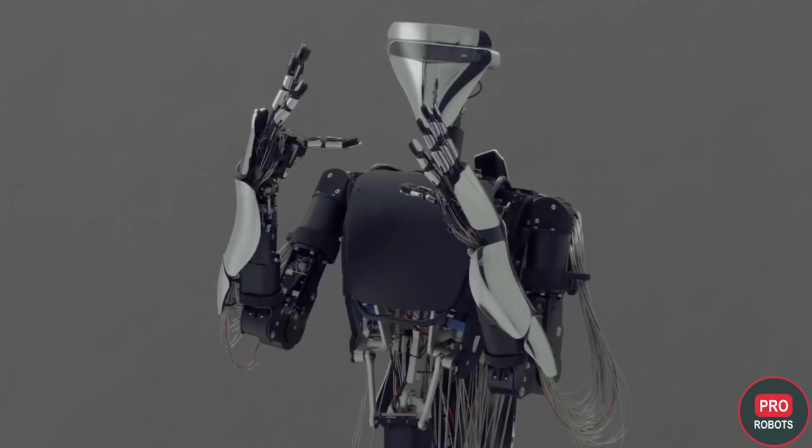Humanoid robots are often accused of being impractical, but that doesn't stop researchers around the world from developing humanoid robots for all occasions. From avatar robots, construction robots, robotic assistants, domestic and research robots, entertainment robots, and the most advanced humanoid robots in the world in today's video.

The most advanced robot avatars today are being developed in Japan. For example, the robot T-HR3, introduced by Toyota in 2017. The humanoid robot is able to accurately imitate the movements of a human operator, including walking and fine finger movements. The 1.5 meter tall robot has 32 joints and is able to move very smoothly.

The control is intuitive. The range of motion is not less than a human, and the VR helmet on the operator's head allows you to see through the eyes of the robot. The robot is designed to interact with people. The last update of the model was in 2019, but for now, unfortunately, it remains only a concept.

MELTIN is developing technology that would help create cyborgs in the future. These are processing biosignals through the nerves in the human body and developing robotic products that replicate the human anatomy. Now the company has 2 robotic avatars capable of accurately replicating human-like movements.

It is MELTANT-α, whose arms precisely copy the structure of a human, taking into account the location of muscles and tendons going to individual fingers. Polymeric elastic wires are used as actuators, and pressure sensors are also installed in the fingers of robots, and the feedback system provides haptic feedback.

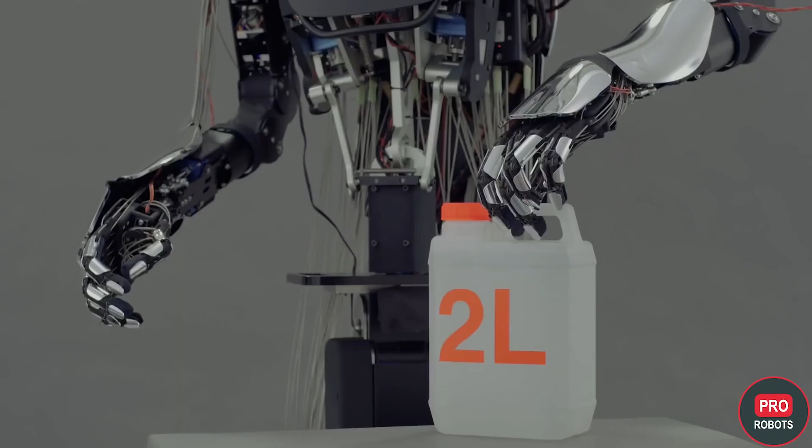The robot is very accurate and very strong. It can hold a 2-liter canister of water with just 2 fingers. A signal transfer from the operator to the robot with a delay of only 0.02 of a second can even be done from a distance of 19,000 kilometers.

And MELTANT-β, designed for interested customers for dangerous work in environments with high or low temperatures, with chemical, biological, or radioactive contamination, and even possibly for space exploration. In doing so, the robot can still communicate to humans, but not only with gripping force, but also with texture of the object.

And then there's Model H, Telexistence's robot avatar for shopping and remote travel in Japan. The robot is controlled by a HTC Vive virtual reality helmet and a pair of controllers. The robot itself is mounted on an autonomous wheeled platform, has a pair of arms and a rotatable head, which has 2 cameras for stereo vision.

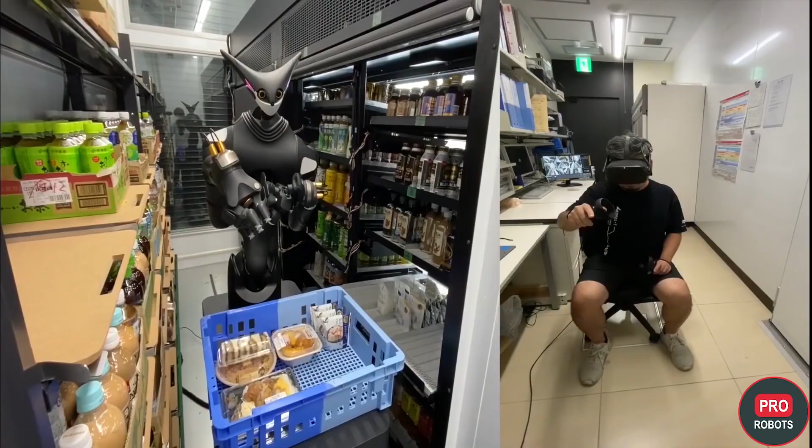A development of the project was Model T Robot Merchandiser, introduced last year. Store employees can control the robot, which acts as a merchandiser right from home using virtual reality. Video communication between the operator and the robot has a delay of 50 milliseconds, which has almost no effect on synchronicity. The robots are already working in stores of the Japanese chain Family Mart.

Now, the company is working to make the robot work faster. But there are robots that are even closer to the human body.

For example, Sarcos Robotics is developing and next year is going to mass produce a wearable robot called Guardian XO. The full-size exoskeleton is battery-powered and increases the operator's strength by 20 times, allowing you to lift loads up to 90 kilograms without strain. Guardian XO dynamically compensates for gravity and inertia, detecting the operator's movements within milliseconds.

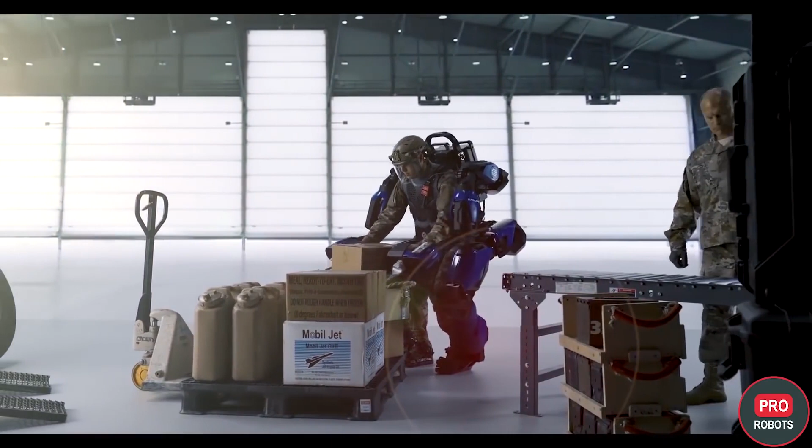The suit's 24 degrees of freedom ensure free and natural movement, and the hands-free mode allows the operator to leave heavy loads in the hands of the robot, freeing their own hands for demanding tasks. The robotic suit can be put on and removed in just 30 seconds without any assistance.

The Guardian XO is the basis for the remotely controlled Guardian XT robot, which no longer needs to be put on. It is enough to control it from a safe distance. In the field of construction and repair, humanoid robots look attractive because they can work with the same materials and tools as humans.

Take, for example, the HRP-5P robot, the fifth generation of robots from Japan's National Institute of Advanced Industrial Science and Technology. It can pick up and move heavy and bulky loads, open doors, go up and down stairs, bypass obstacles, and use common hand tools. The robot does not need constant supervision of the operator, and can perform a number of tasks independently, for example, move or fasten a sheet of drywall.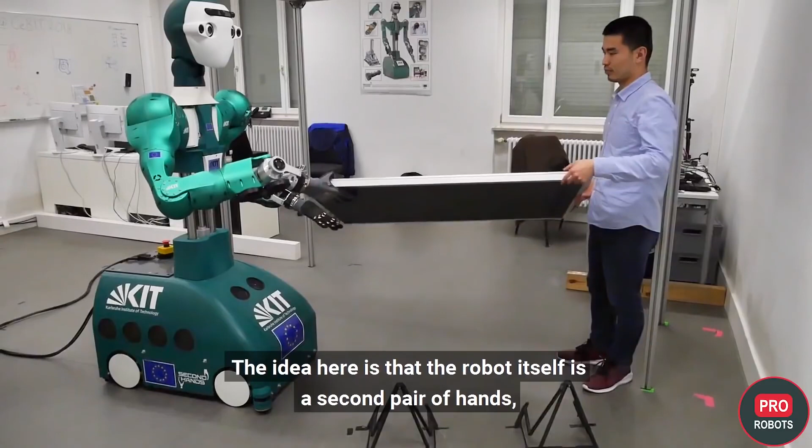The ARMAR-6 robot from Second Hands Robotics, unlike the HRP-5P, is designed to help humans. The robot must understand commands in natural language and be able to recognize in advance what a human is trying to do and anticipate when it will need the help. In addition, the robot will be able to perform tasks that require a level of precision or physical strength that's unavailable to workers. And, of course, it must do all this autonomously and safely, surrounded by people in an active warehouse. The project is evolving, with the ARMAR-6 being tested at Ocado Technology's warehouse last year.

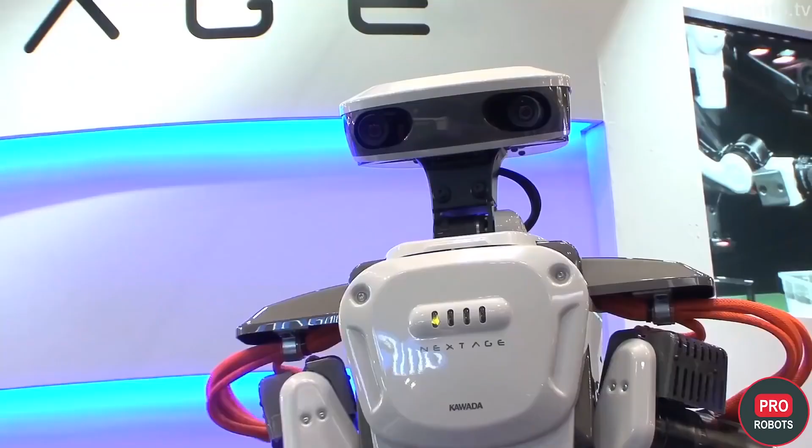Meanwhile, Kawada Robotics' Nextage robots are already at work at the Glory Factory in Saitama, Japan. 19 robots work alongside 300 people assembling machines to sort money for cash registers. The humanoid robots are equipped with cameras in their hands and are capable of performing complex repetitive operations with superhuman power, speed, and accuracy. Nextage can be used without safety barriers, simply by placing it where humans used to work. What's more, multiple Nextage robots can coordinate their movements to work on the same task at the same time.

Another helper robot, but now domestic, is the humanoid robot Walker from UBTECH Robotics. The company currently holds more than 700 patents in the humanoid robot industry. Walker is less than 1.5 meters tall and can recognize surfaces, map terrain, and avoid obstacles, walk on stairs, maintain balance under external influences, and manipulate various objects. It responds to voice, maintains eye contact, and can work safely alongside humans.

36 high-performance actuators, a full range of sensor systems, SLAM technology, and a system with elements of artificial intelligence allow this robot to recognize the host, find and track targets, as well as give an estimate of human posture, making the robot one of the most advanced robots in the world.

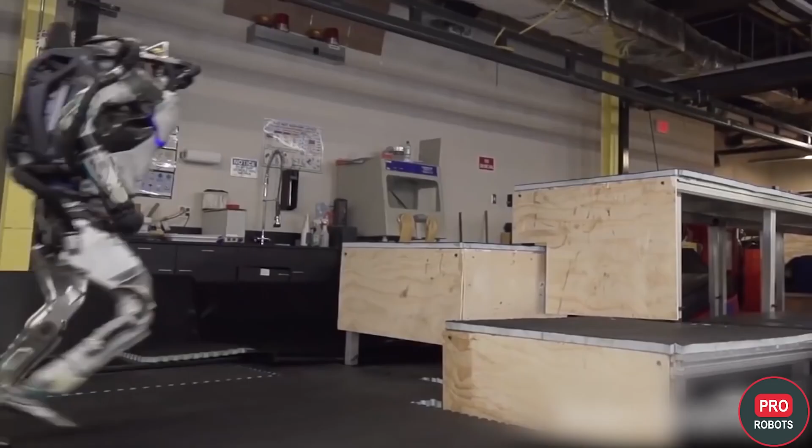Separately, research humanoid robots are worth highlighting in this issue. They don't yet solve specific tasks and are designed to allow engineers to understand what they can do in principle. The most famous and dexterous, of course, is the Atlas robot from Boston Dynamics. Contrary to popular fears, the robot is not equipped with artificial intelligence, but in dynamic movement, it is unrivaled. Cameras on its head, 28 joints in its legs and arms, and numerous sensors throughout the body help this robot stay in balance when making complex movements.

When commanded to do a somersault, the robot relies on a developed library of movement trajectories, but adapts them to the real-world conditions in real time. We talked more about that at the link in the hint, and no, it's not computer graphics, as we're often told in the comments. But the 2020 breakthrough of the American Society of Mechanical Engineers recognized not Atlas, but the Iranian research humanoid Surena 4.

The robot is capable of detecting faces and objects, recognizing and reproducing speech, and walking at a speed of less than 1 kilometer per hour. Surena has 43 degrees of freedom, and its arms can grasp objects in different shapes. Iranian engineers are using the robot to research two-legged movement, artificial intelligence, and to attract students to the engineering disciplines.

If today's episode makes you think of Honda's Asimo robot, we mourn with you, because the project has closed and we will never see this robot again.

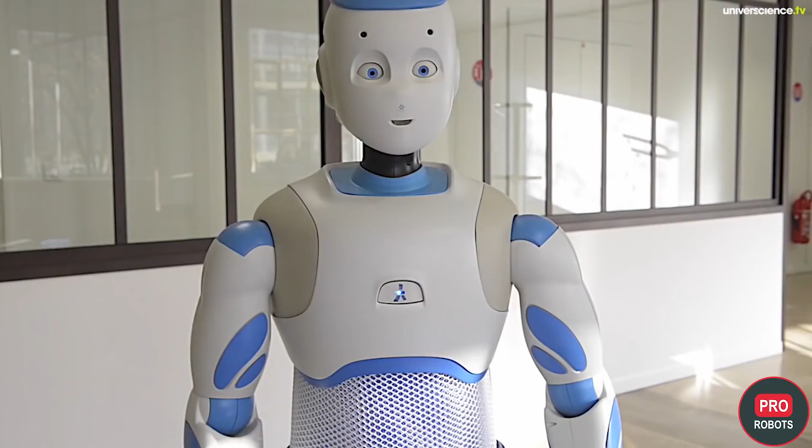Will there be a Tesla plant in Russia? When will the Tesla Roadster learn to fly? News about Elon Musk's Cybertruck, autonomous drones, and new robots for the military. Robot molecules capable of forming tissue, and other science and high-tech news in this one video.

Elon Musk joined the online New Knowledge Conference. There, he said that in the future, all transportation on Earth will be unmanned and electric, except for rockets, which will also fly and fuel themselves. At the same time, to go beyond the solar system, we will need antimatter ships capable of reaching at least 10 to 20% of the speed of light. But first, we need to establish colonies on the Moon and Mars.

And in the present, Tesla will soon come to Russia, Kazakhstan, and other CIS countries, with the possibility of the company's own factory in Russia. And on Twitter, Elon wrote about the new Tesla Roadster, which will be able to fly, although for a very short time.

The entrepreneur explained that Tesla will use SpaceX technology and add new engines for the Roadster, giving it the ability to fly. The maximum acceleration of the rocket engine of the future Roadster will be 96.5 kilometers per hour in just 1.1 seconds. However, when such a concept will become real, Musk has not yet let us know.

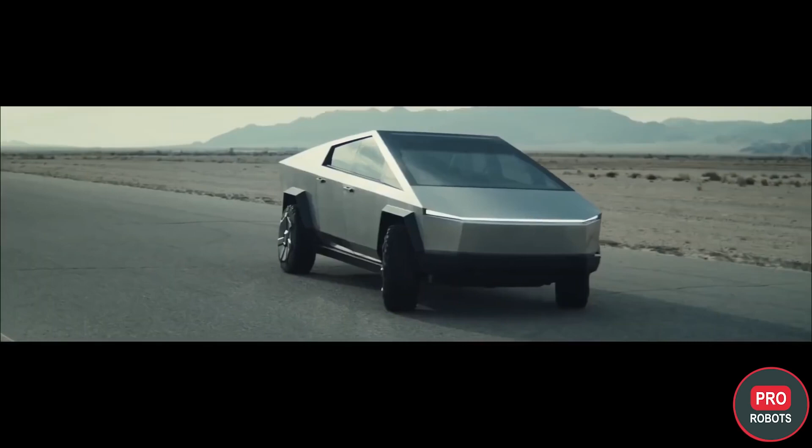At the end of 2021, production of the Tesla Cybertruck model should begin. Previously, it was assumed that the car would be produced in a gigafactory in Berlin, but now production is planned to start in the United States. Recently, at the Tesla Gigafactory in Texas, a possible new prototype of the car was spotted, which fans believe is being tested there. From the amateur footage seen, we were able to find out that the prototype has new details, a folding ramp, and air suspension.

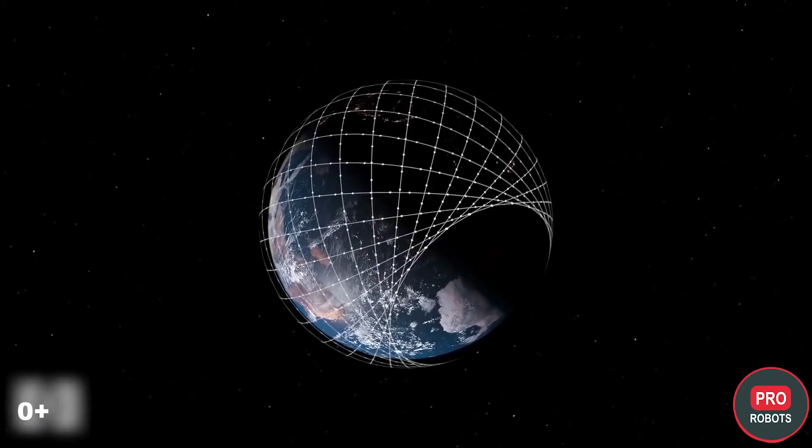The speed of satellite internet Starlink from Elon Musk has reached a new record of 560 megabits per second, but the delay was 13 milliseconds. These figures were recorded by a user from Germany. Experts note that the data transfer rate of Starlink may vary depending on the number of subscribers simultaneously connected to a particular chain of satellites and other factors.

After a 2-year break, Virgin Galactic has launched its VSS Unity space plane to the edge of space. Eve, the unusual twin-hulled carrier plane, lifted the gleaming VSS Unity into the air to altitudes of 13.5 kilometers, dropped it, and then the spaceplane turned on its rocket engine and accelerated to speeds 3 times the speed of sound. VSS Unity then reached an altitude of nearly 90 kilometers, performed a slow somersault in microgravity, returned to the atmosphere in feather mode, and landed smoothly on the runway.

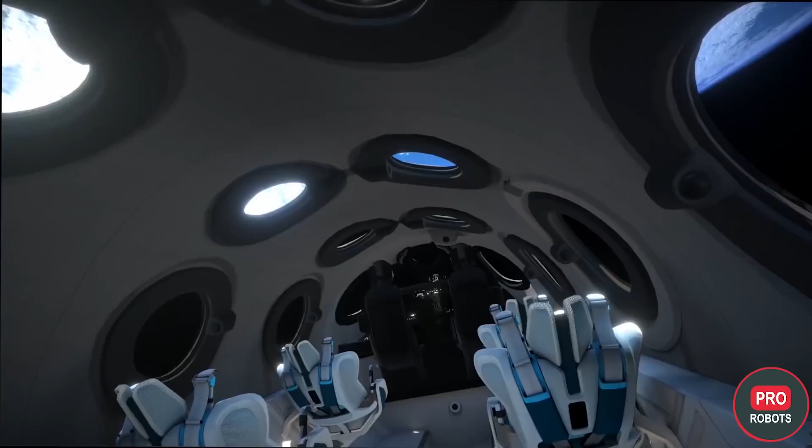The Unity flight, operated by 2 pilots and carrying research payloads for NASA, was the first spaceflight from Virgin Galactic's Spaceport America complex in New Mexico, a sort of futuristic luxury airport for wealthy space tourists. Today, the company has about 600 customers who have already paid about $80 million to send them to the frontier of space someday.

The U.S. Air Force's Skyborg autonomous combat drone, made to accompany manned fighter jets, has made its maiden flight. Skyborg is not really a drone, it's actually more of an autonomous hardware and software system that can be installed on a military drone. During the first flight, the system's artificial intelligence responded to navigational commands, stayed in established geofences, adhered to the flight range, and was able to demonstrate coordinated maneuvering. The Skyborg project should eventually lead to high-speed drones equipped with sensors, weapons, and capable of making combat decisions at a speed only a computer can.

The Israeli Defense Forces Special Research and Development Unit unveiled a new Jaguar combat robot. The robotic wheeled platform is partially autonomous and, in addition to dozens of sensors and its own intelligent navigational system, is equipped with a MAG machine gun capable of firing both from a stationary state and while on the move. The robot can move independently to a given target, bypass obstacles, all while the operator can concentrate on firing the weapon. Jaguar is designed for reconnaissance, surveillance, convoy protection, ambush defense, as well as a decoy. The robot has a self-destruct system.

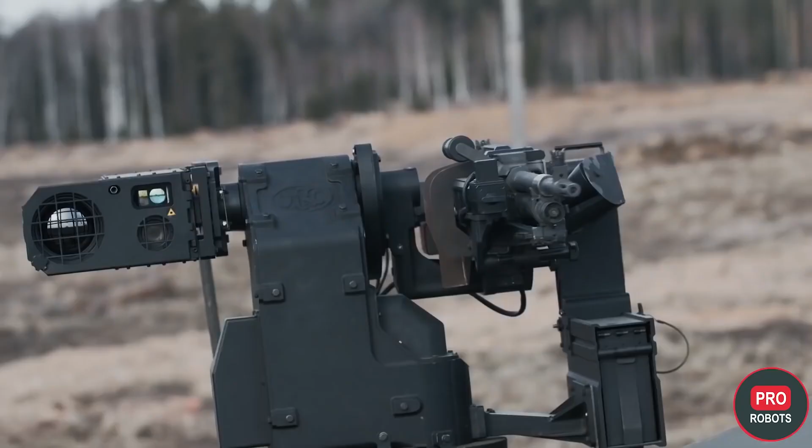Estonia also conducted combat exercises with 2 Milrem Robotics Themis robots, which provided situational awareness, fire support, and casualty evacuation for troops. One robot delivered ammunition to the line of fire, conducted machine gun fire support, and then removed the wounded from the battlefield, while the other deployed a tethered drone to guide artillery strikes. The robots were controlled by the military through a handheld interface and augmented reality headsets.

The German company Rheinmetall will deliver 4 ground robots to the British Army by this summer. It is reported that this will be the second delivery of Mission Master's fire support robots. The robot is armed with a 7.62mm machine gun with remote control. In addition, the platform can be equipped with a 40mm or 70mm grenade launcher. According to the company, the system will require human approval before firing. Britain bought the robots as part of their robotic platoon vehicle program, designed to test how combat robots can improve the firepower and capabilities of mixed combat units at the platoon level.

German aviation company Volocopter showed a concept of its airborne robot cab, which will be able to reach speeds of up to 178 km per hour and carry passengers up to 100 km. The Volo Connect, designed for 4 passengers, includes 6 electric motors, rotors, and a pair of fans in the back.

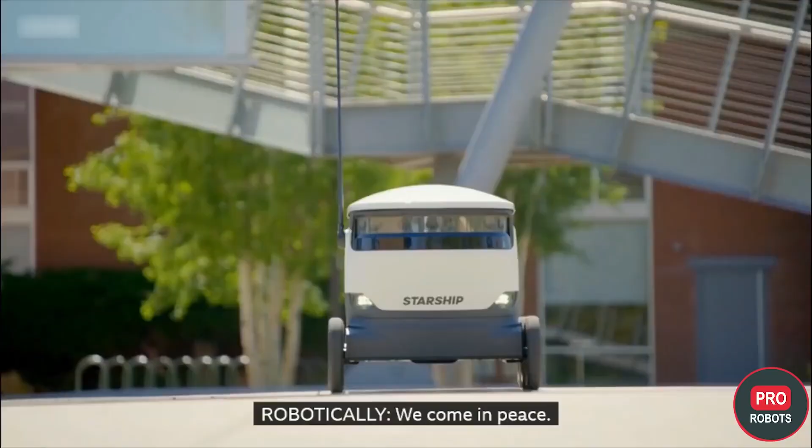The developer of delivery robots, Starship Technologies, announced that it had quadrupled the number of deliveries since the pandemic began, reducing the cost of each delivery so that robot delivery was cheaper than any other option. The good thing is that the company's robo-couriers work mostly on college campuses, so it's too soon for live couriers in cities to sound the alarm.

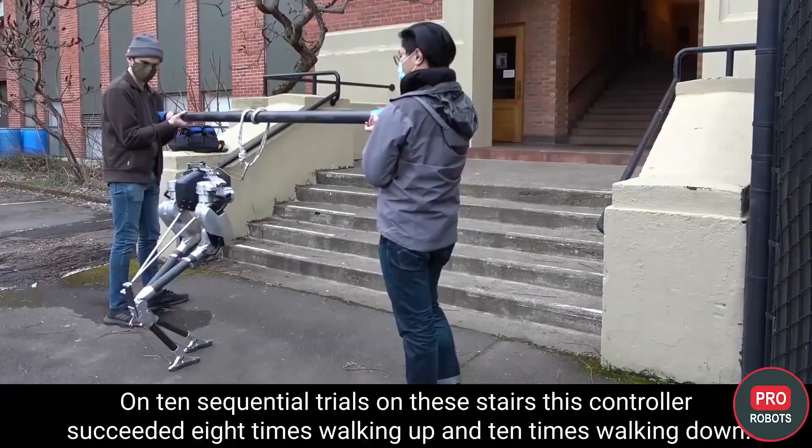Agility Robotics' robot Cassie has learned to walk any stairs blindly. Moving bipedal robots is not an easy task in principle, and stairs are a real headache for researchers. Robots usually need a lot of sensors and a bunch of calculations to traverse a new staircase. The engineers at Agility Robotics decided not to give Cassie any information about the stairs it climbs or descends. The robot receives only proprioceptive feedback, meaning it understands where its limbs are when they make contact with the surface. The robot bumps into the railing, slips off the steps, misses steps, and sometimes walks backwards, but manages not to fall and keeps walking until it gets where it should be. And that is amazing.

The recognition of robots as artists continues. Self-portraits of the robot Ada were exhibited at the Design Museum in London. The robot creates large-scale self-portraits using artificial intelligence algorithms. A representative of the museum said that the work of Ada makes us think about the development of technology, the options for their use, and the risks associated with artificial intelligence. Let us know, how do you feel about robot artists?

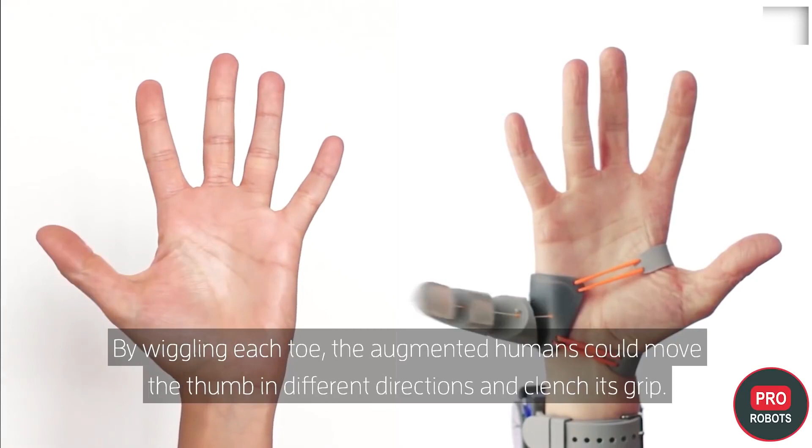British scientists decided to test how the human brain would react to a 6th robotic finger on the hand. The device was controlled by sensors attached to the user's big toes and transmitted signals wirelessly. By rotating the toes, humans quickly learned to grasp objects of different shapes with the right force. But there was a side effect. An MRI of their brains showed that after a few days, the participants' brains had reorganized the natural representation of the hand in the area associated with movement. Basically, it shrank. The researchers don't yet know whether this change is good or bad, temporary or not. The experiment continues.

Another team of researchers taught paralyzed people to use robotic grips using a sense of touch rather than eye contact. Previously, people have always controlled robotic grips by the power of thought, determining the correct position visually. However, this required long training and full attention. Adding other senses would have obvious advantages. So when scientists gained insight into the areas of the brain that process sensory information from the skin of the hands, they implanted two electrode arrays into this part of the brain. As a result, the study participant, who was paralyzed below the neck and had previously been controlling the robotic arm with his mind for about 2 years, was now able to interact with objects much faster and more efficiently.

Italian scientists created Moblot, a model of swarm robotics in which robotic molecules naturally form matter. Molecular oblivious robots refers to a system in which simple robots can move around to form more complex computational units, like atoms combining to form molecules. Once formed, molecular robots can take any shape based on certain compositional properties, forming robotic matter capable of transformation on command.

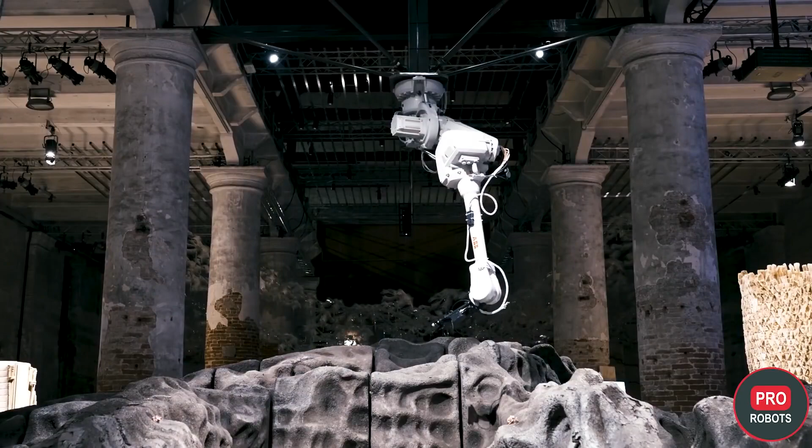ABB Robotics has begun actively promoting automation in the construction industry with new robots. The company believes robots will be able to produce affordable housing quickly, cheaply, and sustainably. The company's research focuses on modular homes, robotic welding, material handling on construction sites, and 3D printing of homes and custom homes. With current housing prices, we would like to believe in the success of ABB's robots and that we will have them too someday.